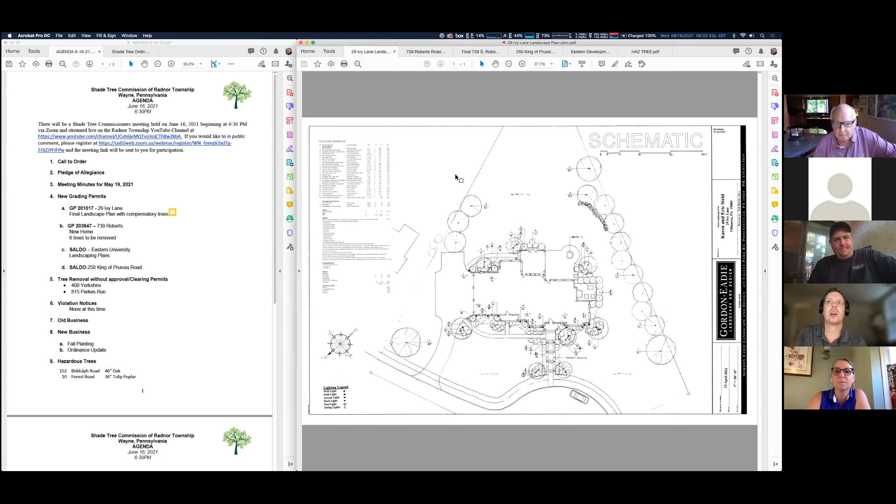So I have your plans up. If you could walk us through your project. I know that you were before us late last year as well, so if you could describe some of the updates that you had. Obviously, we're looking for replacement trees being taken down, tree protection, how you're getting in and out of the site, things of that nature.

Presently, the house is completely built. We're roofed, sided. During the process, we encroached upon the 36-inch beech tree, which was on the original plan as being saved. The house, the way it laid out, and the root system of the tree became a dangerous situation. So I contacted John and got a report from an arborist, and he deemed the tree as, after we got done building, that the root system would be compromised and that we would have to take the tree down.

So we contacted John, emailed him. He agreed with it. We took the tree down. And we have now proposed the compensatory trees with this Gordon-Eadie plan from Doug McRae. And we are seeking approval of this commission to proceed with the plan and have that be acceptable to replace that — not going to replace the 36-inch beech, but with trees. And we're hoping that this plan will suffice.

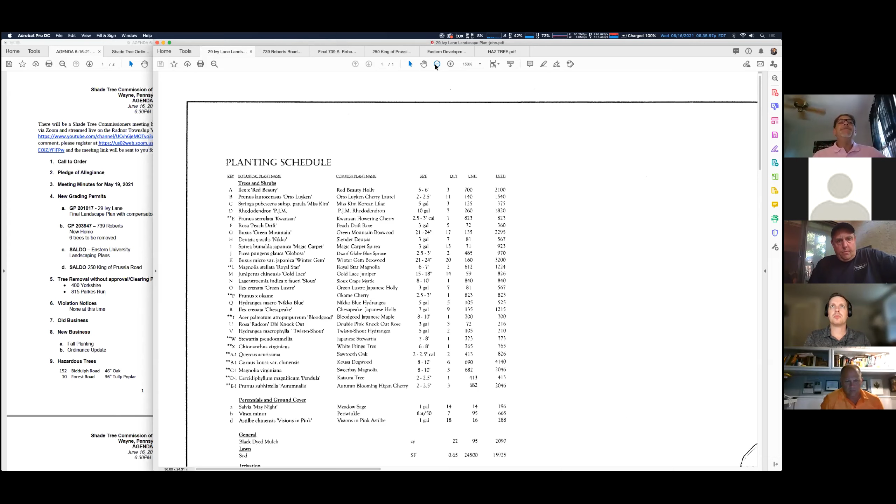Okay, can I ask a question? Yes. So I see the planting schedule and I see 22 required, 22 provided, but I know you were here earlier, but there's nothing that shows what was removed. What I would have to do is send you the original subdivision plan with those trees on it. Only reason is, I don't know if the Shade Tree Commission wants to verify that there are 22 compensatory trees required, and that's up to this commission. I'm just asking the question. Okay.

Yeah, I could send over a plan. Unfortunately, I don't have it with me right now. Yeah, so those 22 compensatory trees, those were from the previous approved removals, right? So this is just an amended plan with that new tree being removed.

Because of the beech trees, Jeff. Right. Correct. I asked that they be here tonight. Sure. So I'm seeing the double asterisks. I'm seeing more than just our required 6. I'm seeing 1, 2, 3, 4, 5, 6, 7, 8, 9, 10, 11 trees. Correct.

And to confirm, these trees weren't a part of the original replacements, correct? That's correct. Okay, so these are new additions. I did ask Bob to expound on his planting schedule because of the nature of the tree. The tree was very healthy. Approximately 38% of the root system was going to be impacted.

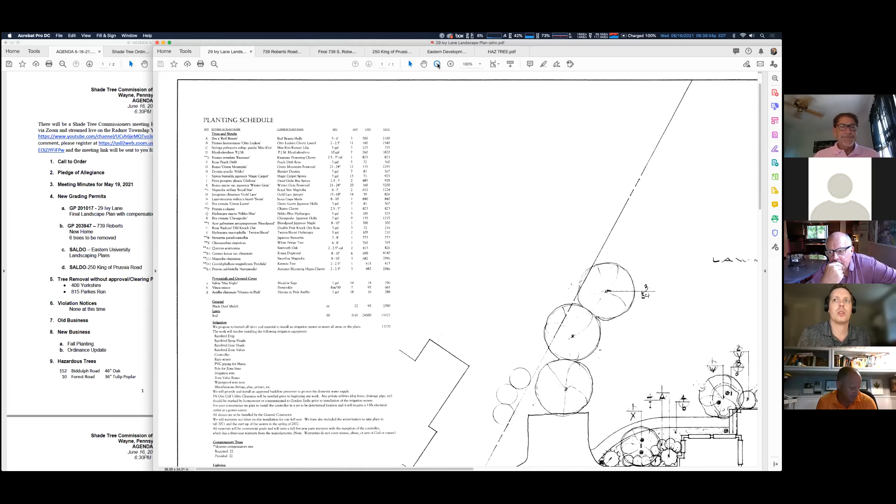So my suggestion to the commission would be, to Steve's point, we should get the previous plan that shows the tree that was removed, just so we have that on file. So hold on one second, I'm gonna send this to Ian so he can pull it up. Okay, thanks, Trish.

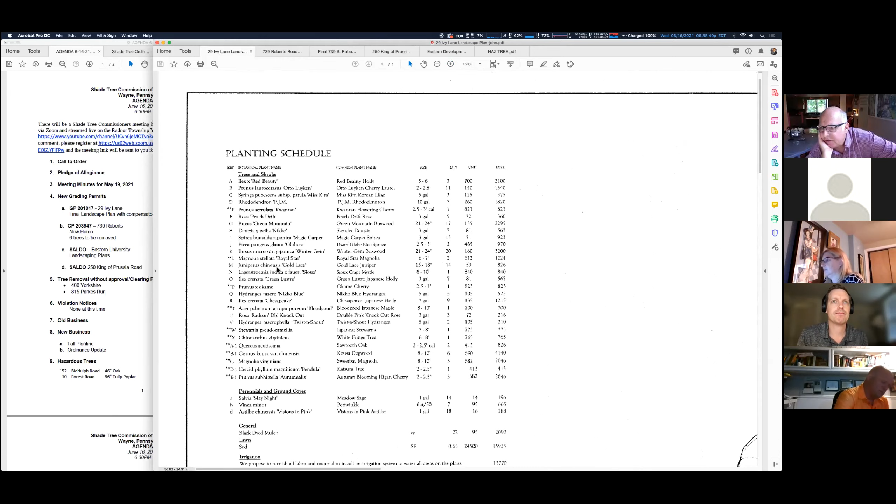Before we move forward, does anybody on the commission have any comments or questions? Is there any reason for shade tree protection to be shown on this plan, or are we past that stage? We are past that stage. The protection was originally for that beech tree. There was no other protection to provide.

Okay, so there's nothing going on here right now construction wise. We're in the finishing stages of the house at this point. Okay, and Ian, I just sent that to you, the landscape plan that we're looking at has not been executed yet. So this is scheduled to be planted. The trees are scheduled to be planted starting about the 3rd week of July. Okay, that sounds good, got it.

If Ian's unavailable to pull it up, I can see if I can dig it up quick, Trish, if you want to send it to me. I got the email, it's just taking a second to scan, and then I can switch to my screen. Perfect, thanks Ian.

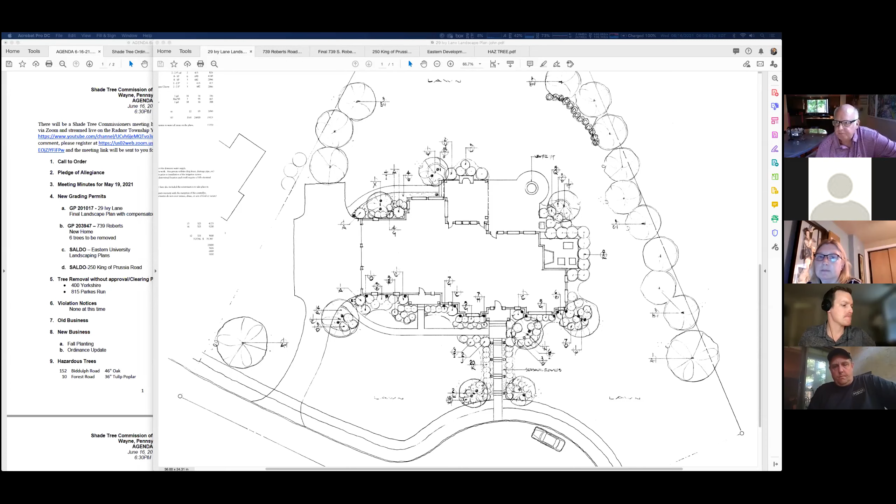Do we know how many large canopy trees were supposed to be planted on this? Well, it should be 4 for this new tree, for that beech, in total. Because we don't have many, there's not many large canopy trees in the plan. I see the sawtooth oak, I guess, is 2 of them.

Yeah, I will say we previously approved this. Absolutely, that's why I'm asking, because if there was no large canopy, then these could go towards it. But there was no heritage trees in the previous plan. I got you. But I think I would recommend that, depending on what the plan was approved with, the 4 additional large canopy, I think we should see more in this planting schedule.

There's not really, unless somebody sees something else, but the oak, I guess I don't know if we consider Katsura. It's a medium-sized tree, yeah. They're all medium or smaller sized trees, so I think since there was a healthy tree, there should be some large canopy per the ordinance planted.

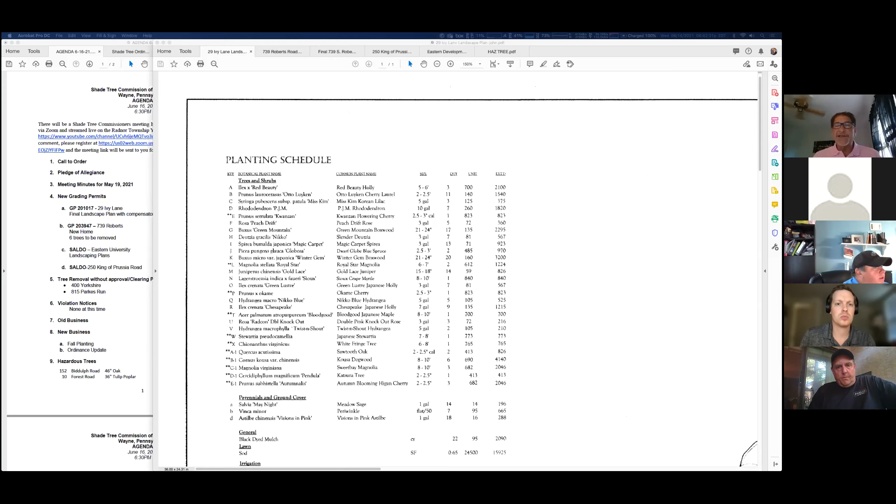Can I make a suggestion? So usually the Shade Tree Commission likes to see the tree table for the whole job. Have Gordon-Eadie provide, from a combination of the last and this, noting what was removed, what's compensatory, include the beech, note what was from the previous plan, because I think what you're seeing here, they're struggling to determine if the compensatory trees are correct. But since the other plan is from 6 months ago, they have nothing to go back to. Okay, yep, we could certainly do that. Yeah, that's just a suggestion. I don't know if that's what the Shade Tree Commission wants to do, but that's just a thought.

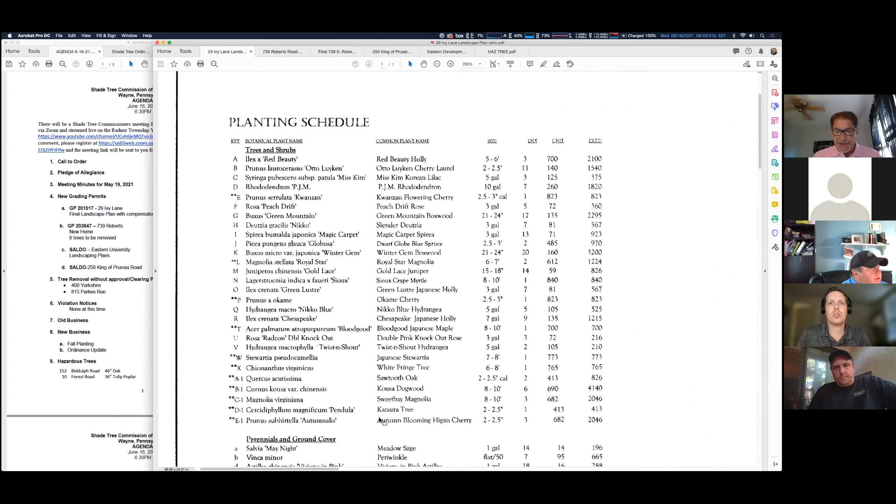Yeah, I would agree with that. Yeah, that seems good, Steve. Ian, how you making out? I have the plans ready to go if you want to switch to them. Okay, yes, go ahead. Thank you.

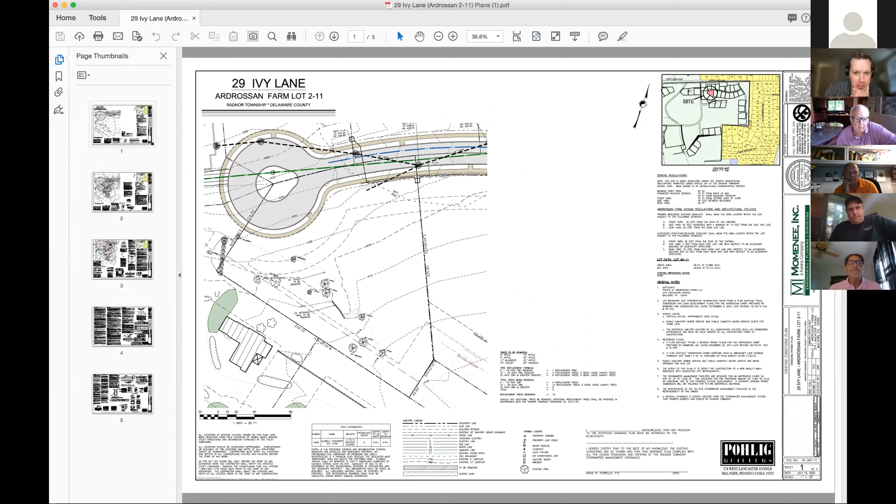All right, so obviously this plan is pre-house. Is there a page in these plans that shows... there we go, okay.

Is there a page that shows the beech tree? So that beech tree is located right where you see the angle of the red dotted line, right off the front corner of the house, southwest corner of the house. That is the beech tree. Got it, okay.

So does anyone have any questions from the commission on this particular set of drawings we're looking at? Straightforward. I think this should be submitted along with the revisions we're discussing, which are to revise the plan to show the tree table, really digging into the large canopy trees, make those revisions.

Is there a table in this plan here? On this plan, there's not. Okay. Were there trees removed? There's a table on the plan previous to this one that shows the trees that were removed. And then there's an approved township plan of the compensatory trees we proposed to replace the ones, if you keep going one more page.

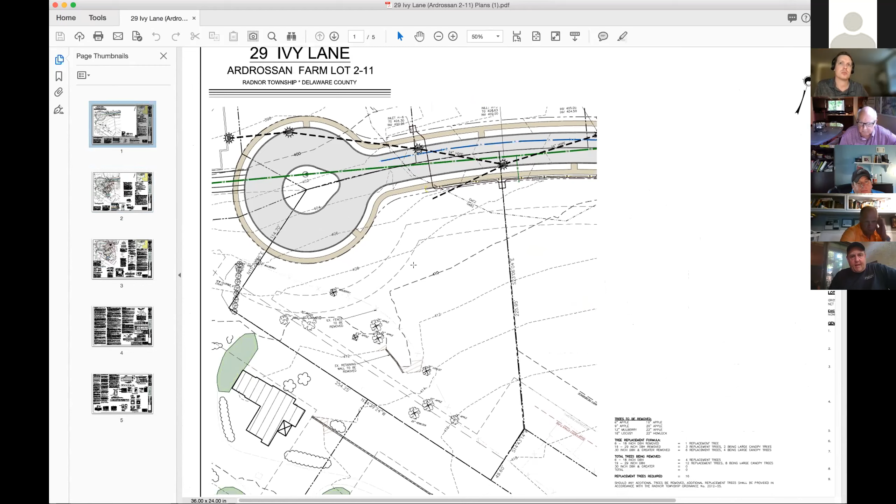The ones with the X through them are the trees that got taken out to accommodate the original approved plan. Right, and then there's the tree formula, bottom right. Can we enlarge that?

So it does look like there were a few that fell between the 19 to 29 inch range, which would require 3 replacement trees, 2 being large canopy. Where are you seeing the 19 to 29, Seth? So, 20-inch apple, 22-inch apple. Got it, yep.

So 8 being large canopy, that was with this plan. And then with the beech tree being removed, we would need 4 additional, so that would be 12 in total that would need to be large canopy. So the plans that I was seeing, I don't think we saw 12 large canopy in that planting schedule, which I think would be the discrepancy we're looking at here.

So we would have to take the original approved plan from the township and overlay that onto the plan we're looking at tonight. We will do that and resubmit this so you can see clearly what we're intending to replace, both the original and the beech tree, with the large canopies. Okay, just make sure Gordon-Eadie takes a look at our approved tree list.

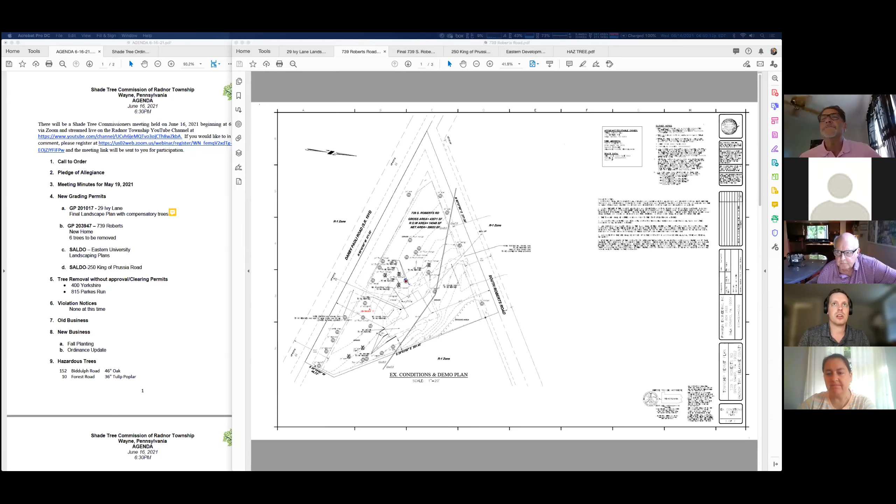Sounds good. Good evening, Heather. Good evening. We also have the applicant who is also in the meeting. Perfect, sounds good. And I know Matt and James, you were working to review these plans and make some revisions. I grabbed the latest plan that was outlined in your email, Matt. So this is the one I have. Yeah, Seth, that should show 30 replacement trees. Okay, great.

So Matt, do you want to — actually, before we have you speak, Matt, if we could have just a quick overview of the project. If we could go through the trees being removed, trees being replaced, and access points in and out of the property and any tree protection. Sure, I'm happy to do that.

So this property — Oh Heather, I think we lost you for a second. If you can hear me, we can't hear you. Yeah, it looks like your screen is frozen. Froze now. Let me see if I can message her through the chat. I think there was also someone else on the line from this property, the applicant I think. Hi, I'm the applicant and I'm on the line, but I think Heather's probably the best person to talk this through. Is there any chance you could maybe text her quickly? Yes, it looks like she dropped, so she might be trying to get back on. So we'll just give her a minute, thanks.

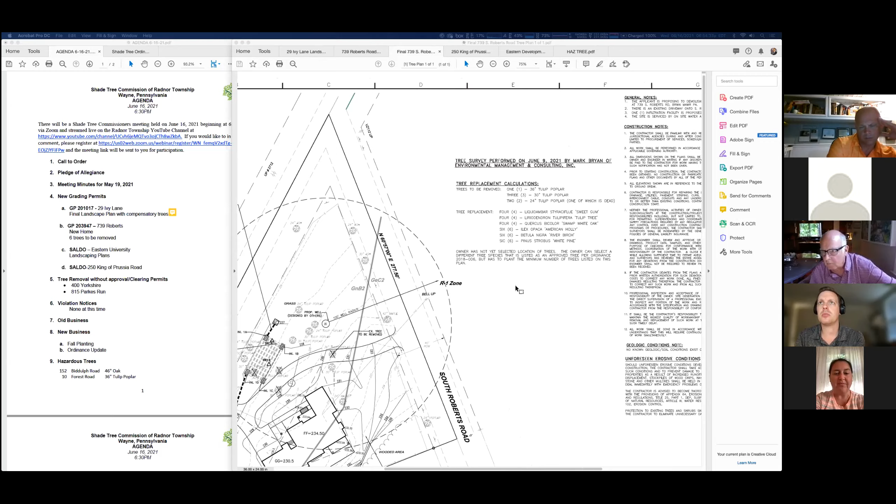Great, thank you for that overview. Sure. And Matt, I know you were going through some items, so go ahead and continue where you were. Yeah, so basically James and I signaled to Heather that the plan was missing some key elements that Shade Tree needs to see, so she hopped on it and used our formula for replacement to produce the replacement chart. And like I said before, all the trees needed to be labeled by species and size, and that was done. Tree protection looks fine.

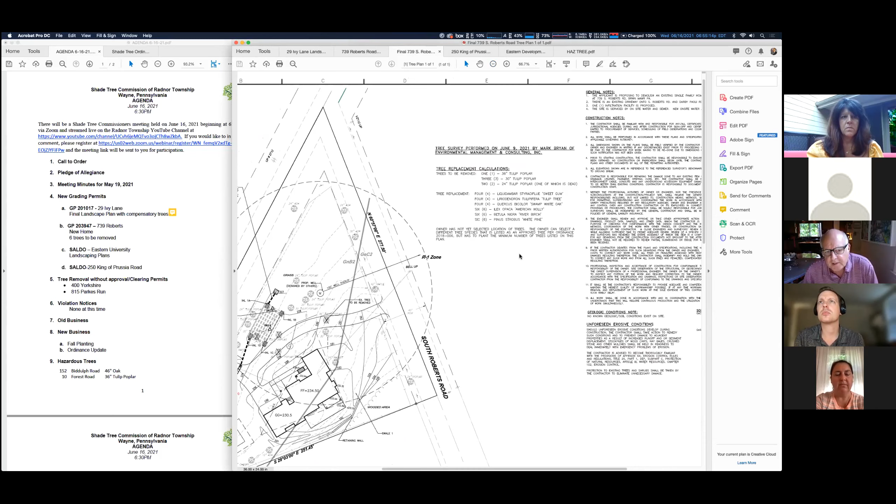Very good, thanks for running through that, Matt. I do see this note, Heather, that the owner has not yet selected location of trees, so we don't yet have the planting plan, which I think is okay from our perspective. Just wanted to call that out.

But also just wanted to note there was a comment about tree species, making sure that if there are any changes, they need to retain being large canopy versus not, per the formula. Correct, if there's any deviation we will make sure, but on the plans we picked, there was a combination of large canopy, and we'll absolutely be picking from the shade tree list if there's a deviation, but that we're putting forth the type of species and the amount of trees required by replacement.

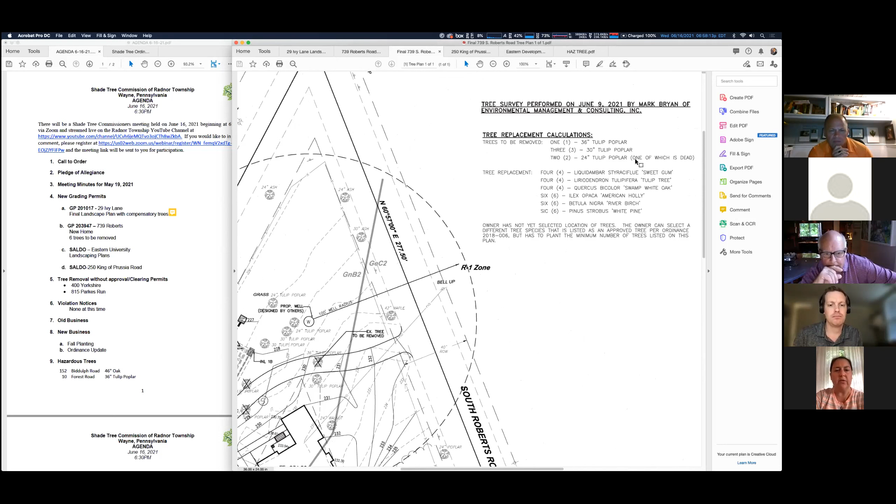Do we have a report for that tree? We don't, but we worked with Mark Bryan of Environmental Management & Consulting, who specializes in identifying wetlands and various landscaping. He performed a site visit to verify all the tree types and diameters, he's a specialist who went out on site. While he was there, he noted that one tree was diseased, several of the others were in average condition at best, but there was clearly one in poor condition.

Okay, we do require a hazardous tree report for anything that accompanies tree removals over 6 in count. So what I would recommend to the commission is that, based off of all the revisions made, it looks like everything checks out, but we should get that hazardous tree report on file, and it sounds like it wouldn't be a problem. It would not. I'll have Mark Bryan get that to you immediately.

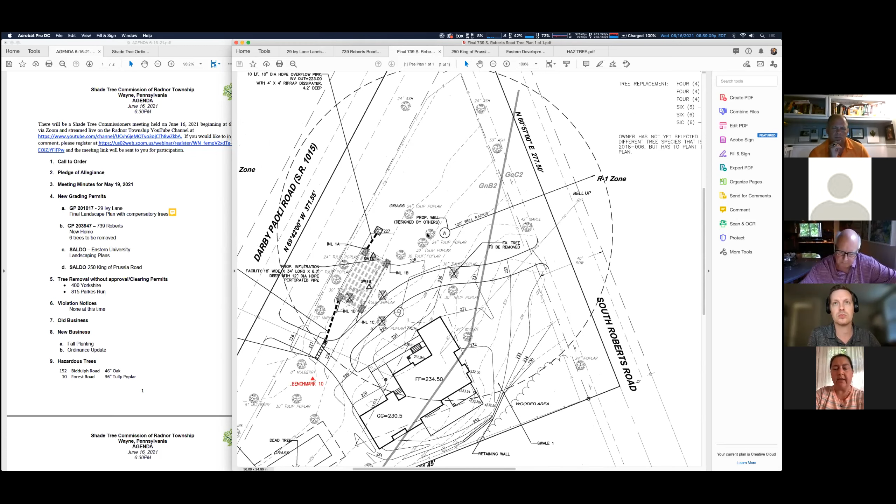Any other comments or questions from any of the commission members? Silence is golden, good. Let me ask you this - I talked to Matt and Matt was extremely helpful, so Matt, I appreciate that.

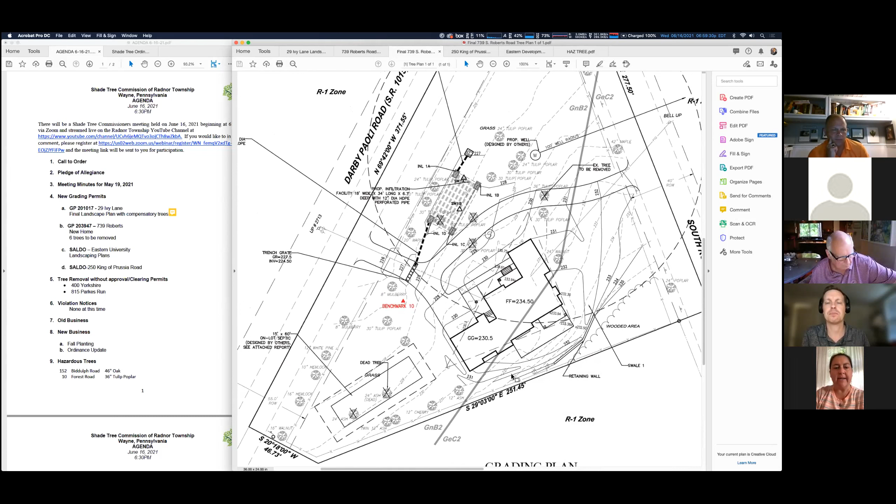Assuming we get this letter to the township by the end of the week, I don't think Steve Norsini had any comments. Would we then be able to obtain an approved permit in the next week or so? Yeah, I mean the idea would be we would approve this with that condition, so as long as that gets in the hands of the township sooner than later, that shouldn't be a problem.

That sounds great. Are you, like Heather, asking for the final approved permit? Is that what you're asking? No, correct, so we can't guarantee that. It's going through our outside engineers, so we have to wait for them to give the final approval.

Once that happens, then it'll go to Steve. He will review all of their notes, dot all the i's, cross all the t's, sign off on it. It'll then come back to me, I'll process it and then call you that it's ready. Okay, that sounds great.

And Gannett Fleming will reach out to you directly if they have comments on the plan that you need to address, so that may be an intermediate step in there. And one quick thing that we didn't run through specifically was tree protection.

Matt or James, did you guys get a chance to dig into that? Did you have any questions specific to that? It looks fine to me.

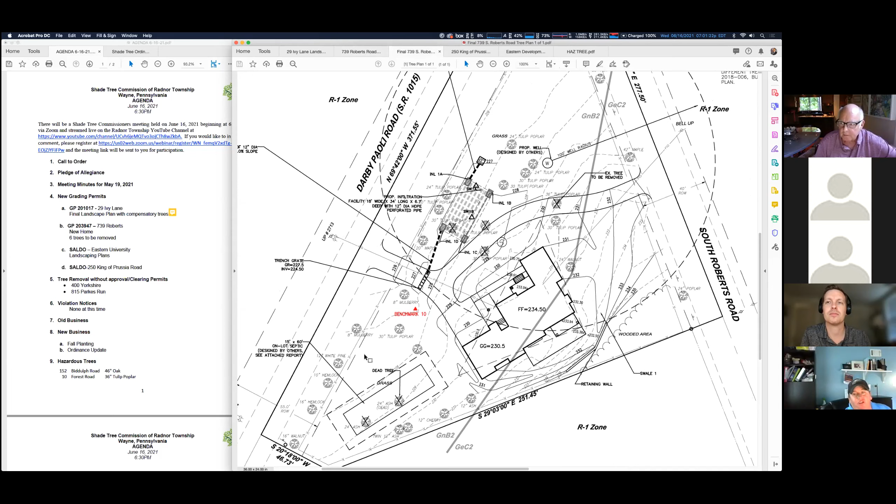I would make one suggestion though: the hazardous tree report should be from the arborist or the company taking down the tree, if you're doing a hazardous tree report. Right, by a certified arborist. Yeah, so just noting that - ISA certified. There we go. Thank you, Steve. Correct. The only way to go.

Okay, so it wouldn't be from Mark Bryan Environmental Management & Consulting. It would be from whoever is the contractor doing the tree work. Right, yeah, thanks for that clarification, James. It has to be a certified arborist, and anyone doing tree service work in the township has one of those folks on file, or at least they should. There is a hazardous tree report form online, Heather, and that'll outline what you need - the pictures, the requirements, the certified arborist's number, all that good stuff.

One question - is the hazardous tree being compensated for with other trees or not? I'm sorry, I didn't hear that. Are you planting trees in place of the hazardous tree or not? Well, I think so, if you do the math, yeah. They are, so yeah. I wouldn't require that any hazardous tree report be done since we usually do that if you're not going to replant.

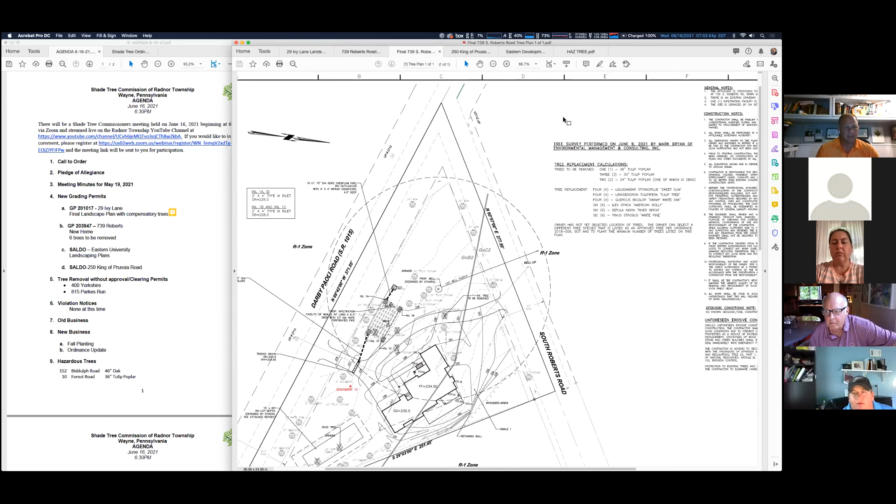Just so the homeowner and you guys know - that is a good point. So I wouldn't hold anything up for a hazardous tree report. But I still think we would like to have it on file, though. Yeah, absolutely, we need it on file.

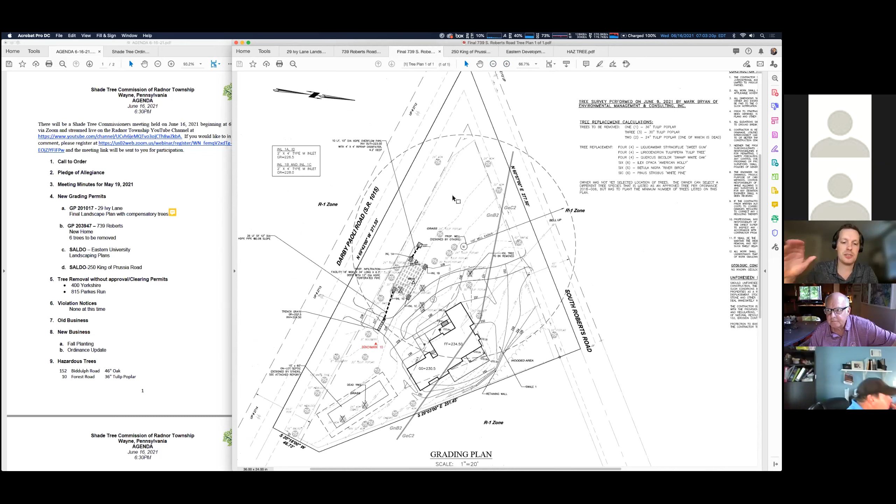Okay, well, I'll make a motion to approve with the contingency of getting that hazardous tree report on file. Do I have a second? Second. All in favor? Aye. All right, thank you so much, and good luck with the project. Thanks, Heather. Thank you very much.

All right, I know we have Eastern next on the agenda, but Eileen asked me to hold that in case she's able to hop on. So if we could go to 250 King of Prussia Road first, and then jump back to Eastern, if that's okay with everyone.

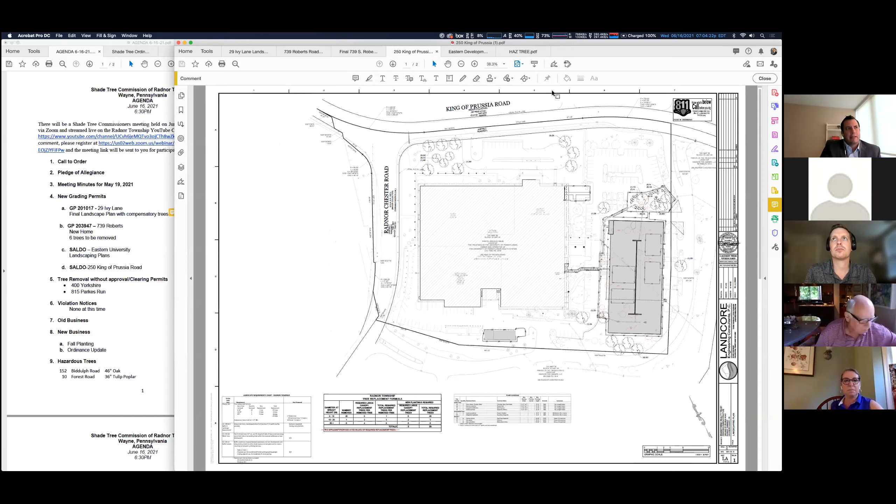All right, so who do we have from 250 King of Prussia? Good evening, this is Bob Tucker from Kaplan Stewart, representing the applicant, BDN 250 King of Prussia. Hi Bob, welcome, good evening. The applicant owns the property at 250 King of Prussia Road. We're seeking to construct a parking structure to add much needed parking to this building, which the applicant is seeking to re-tenant. It was recently purchased. This evening I have a representative of the applicant, Joseph Trainer, as well as our engineer, Alex Tweedy. Alex is going to go through the design of the land development plans, and I think Joe will make a few comments before. So with that, I'll turn it over to Joe.

Thanks, Bob, sounds good. Thanks everyone for your time tonight. I'm Joe Trainer with Brandywine. As Bob mentioned, we're currently going through the land development submission and review process for adding a parking garage at 250 King of Prussia Road, which is done in an effort to improve an existing parking deficiency on site. There's an existing building there now - it used to be the Penn Medicine facility. We, Brandywine, purchased the property from them after they moved to their new facility down the road. As part of modernizing the existing building, one of the things we're looking to do, and really the big aspect to the project, is adding a parking garage to resolve a parking deficiency. As part of that, we do have some trees that need to be removed and replaced, and Alex Tweedy from Landcore will walk you through the plans.

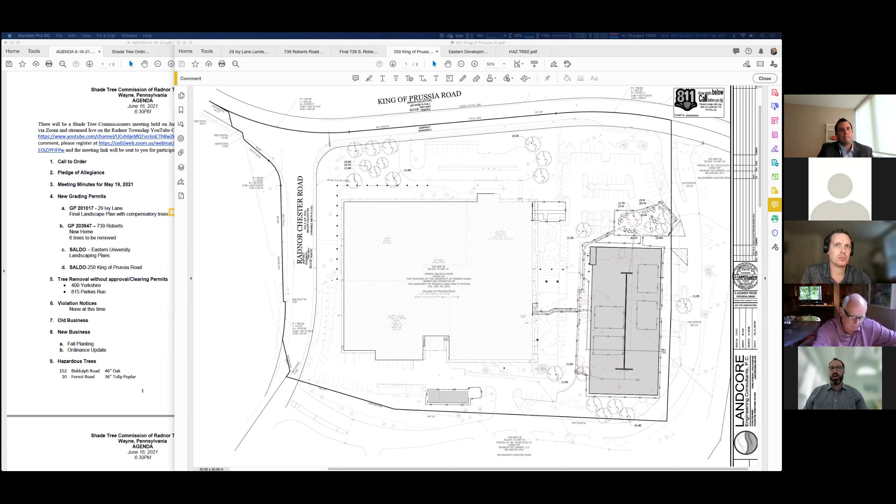I also wanted to note that as part of our land development submission, we are requesting a waiver for street trees around the existing building. However, after we received our review letter from our initial land development submission, I had asked Alex and his team to take a harder look at the street trees and really add more trees along Radnor Chester Road and King of Prussia Road where possible to help minimize the waiver, which Alex will also walk you through tonight. So with that, I'll turn it over to Alex, and thank you again for your time tonight. We're looking forward to hearing your comments.

Thank you, Joe. Thank you, Joe.

The drawing shown on the screen is the original submitted land development drawing from the original submission. All the trees you see on this drawing are the replacement trees. In the footprint of the garage, shown in red if you zoom in, are the trees being removed. We have them shown underneath - if you're familiar with the property, those are basically the existing surface parking drive aisles that are there today. So the trees being removed are really the parking lot trees in the center islands along those parking rows.

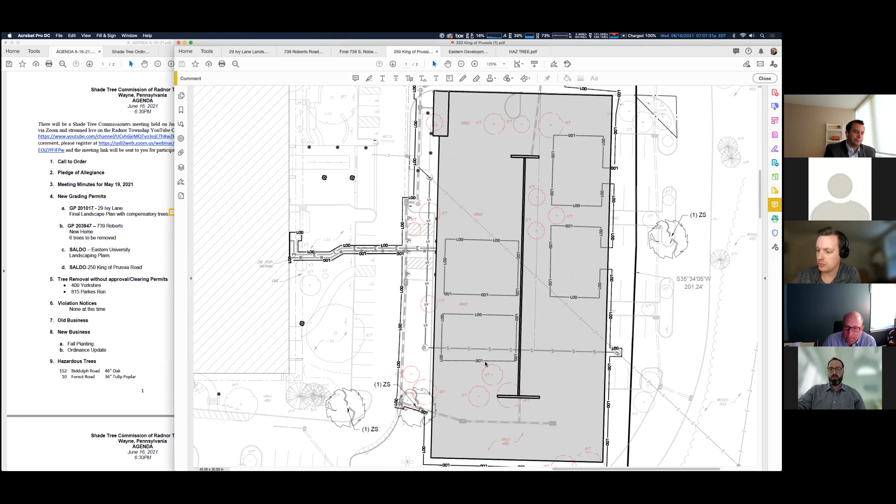There are 21 trees total being removed, 20 of which are below the 19-inch standard. If you go into the bottom right corner, peeking in at the very bottom of the garage, there is one 24-inch tree being removed that triggers the next classification for three replacement trees.

So there's a total of 23 replacement trees being proposed for the project. As Joe noted, in discussions with the Planning Commission and with the review letters, there are a variety of landscape waivers as part of the land development application, one of which is a parking lot tree waiver. Since it's a parking structure, obviously we can't plant trees within it, so there's a waiver for that landscape requirement, as well as a street tree waiver requirement.

In discussion and coordination, both internally and with the Planning Commission, we have looked at places to add additional street trees. This drawing shows a red line of where we feel we can add additional street trees and the species we would propose in those locations. With this alignment and the existing trees, this would be 50% of the required street trees. So it would just be a partial waiver for proposing half the street trees, and then a waiver to not install the remainder.

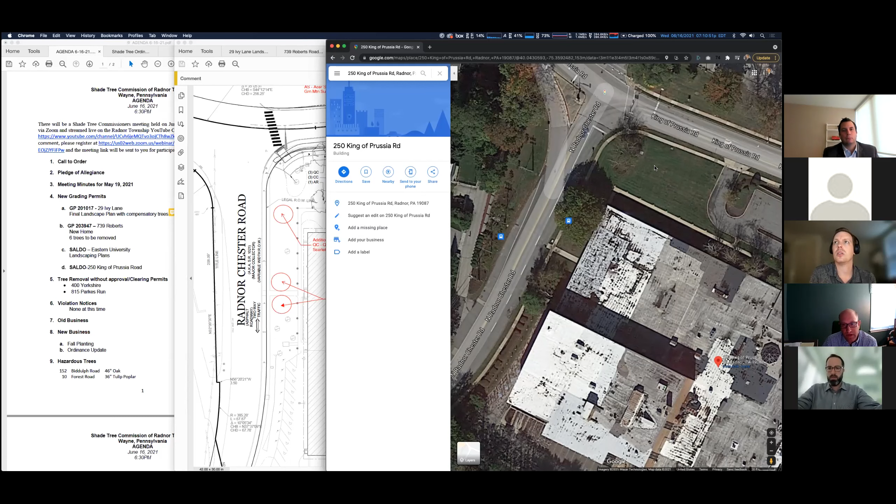And then on the upper right, that large green space, that's where we're putting the majority of the replacement trees from the original landscape plan. Okay, and then the remainder street trees are just lining King of Prussia Road, down along the rest of the property there. Sure, okay, thank you.

So the tree replacement formula checks out to me. What we just need to verify are the large canopies - they're all proposed as large canopy. Okay, yep, I was just drilling into the plant schedule real quick to verify.

Matt or James, did you get a chance to review this in detail? Do you have any questions? Yeah, the required trees look good. There's only 2 large canopy and they have October Glory in there, so they're covered just with that.

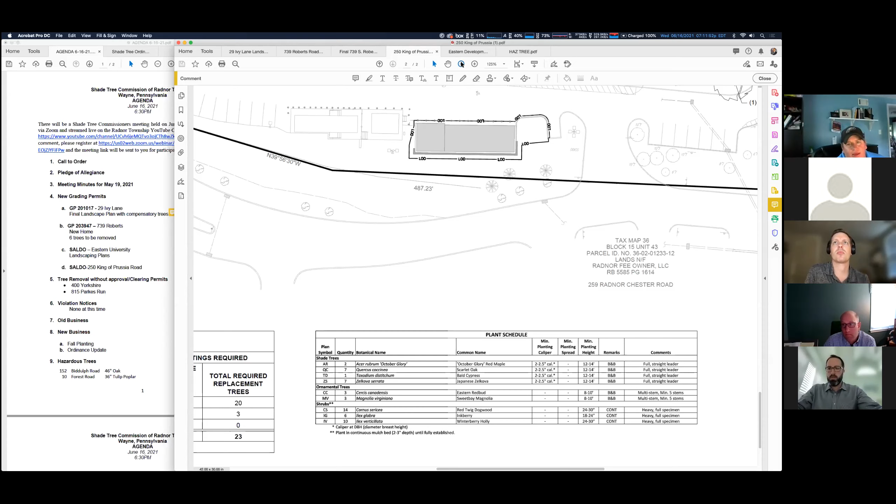But one question I do have is the rain gardens - are they in place of something, for some other reason, like stormwater management? I don't know that I follow the question, but yes, you have rain gardens there.

Are they put in place because of stormwater? The rain garden is our proposed stormwater management feature. We originally had an underground basin, and through the zoning process, there was additional green space desired with this design.

Where the rain garden is located is actually existing parking lot today. We agreed to reduce the total parking yield by 10 to 20 parking stalls through the land development process and converted that underground stormwater facility to additional green space, reducing impervious coverage and converting to a surface stormwater system, which also allowed us to plant some additional landscape material.

to improve the aesthetics of that entrance as well as some circulation items. The reason I'm asking that is this would be for Steve. There's trees in the rain garden, Steve, that are counted in the replacement schedule. So I'm wondering, are they able to be intertwined? They might be able to, I'm just curious.

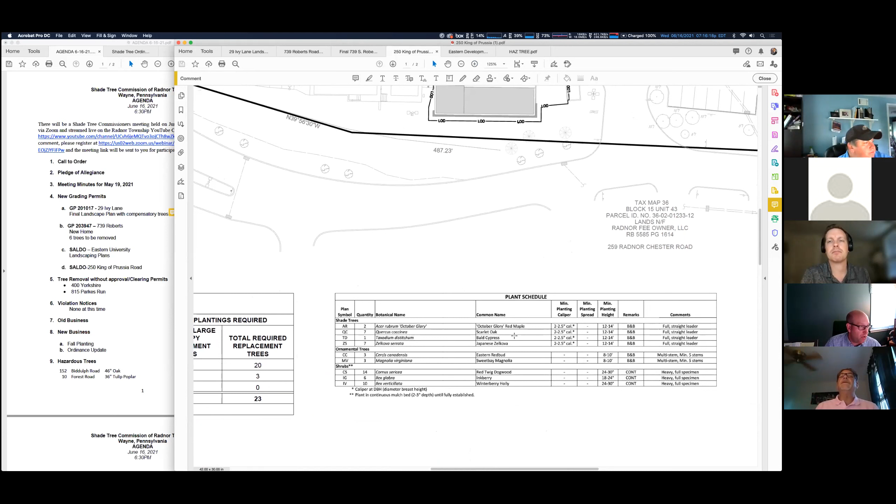So we have 9, 10, 17 trees that are shade trees. Correct, that's a red maple, scarlet oak, bald cypress, and Zelkova. And then we have 6 additional ornamental trees, which are eastern redbud and sweet bay magnolia. And then we have 30 shrubs, which are in the rain garden, and those are red twig dogwood, inkberries, and winterberry hollies. So just for the shade trees, the shrubs are ornamental, they're not part of the count, but the shade trees and ornamental trees do comprise the required compensatory trees: 9, 10, 17, 20, 23. Okay, sorry for any slowdown there, I just want to make sure I'm up to speed and everybody else is.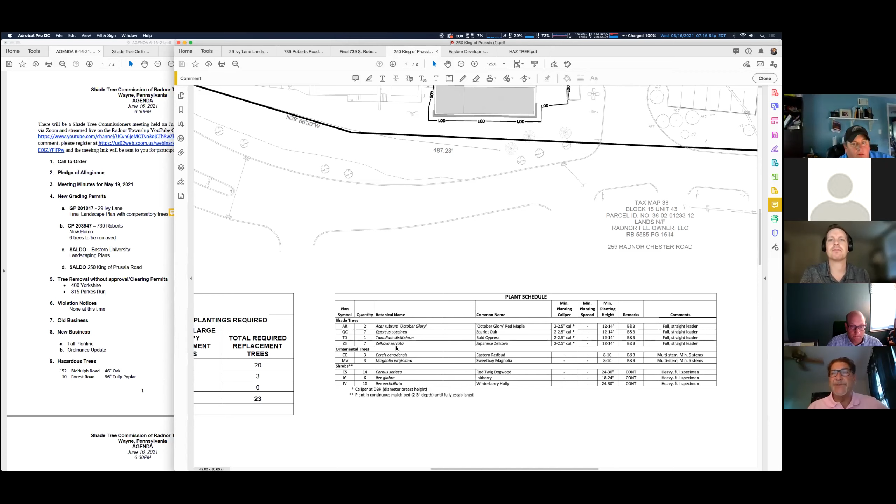Correct, so then we go to the street trees. Can we go to sheet 2 for that? Let me pull up the math I did for that. For King of Prussia Road street trees, there's 640 feet of frontage, so with 1 per 30 feet, that requires 22 street trees to be required.

There's 7 existing trees along King of Prussia Road. The Radnor Trail is planting 1 tree, you can see right by our entrance in the corner. And then we are proposing 3 additional as shown on King of Prussia Road. So that equates to 11 total trees out of the 22 required, which is half of the required street trees on King of Prussia Road.

And then similarly for Radnor Chester Road, it's 415 feet of frontage. At the 30-foot spacing, 14 trees are required. There are 4 existing trees and we're proposing 3 more for a total of 7, which is 50% of the 14 required. This math is spelled out in the lower left corner of this markup if you want to look at that instead of my explanation.

So Steve, are trees that are already in place able to be counted towards that part? Mr. Tweedy noted this is a partial waiver. So this is a waiver request, whether it's partial or not, it's a waiver, and that's solely at the discretion of the Board of Commissioners if that waiver is granted. I want the Shade Tree Commission to understand it and opine on it, but in the end, when they go through the land development process, they're going to be before the Board of Commissioners, and they will be the one to say yay or nay on the street trees.

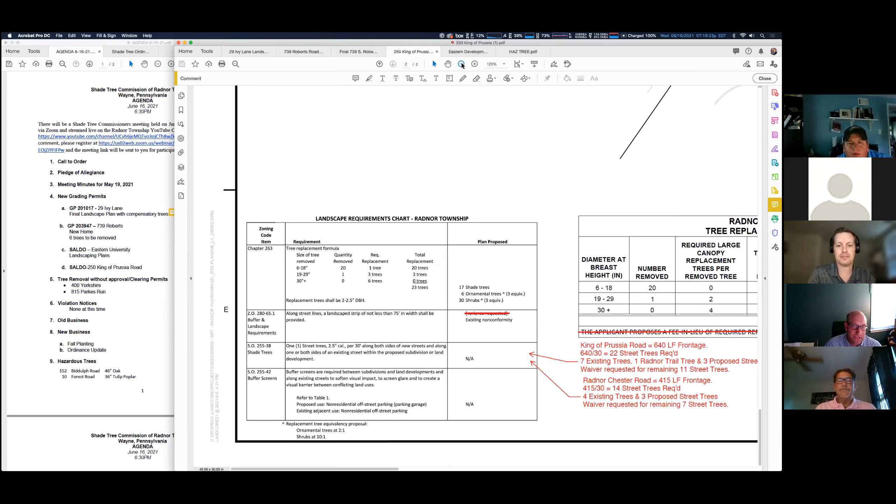So Steve was accurate. And Alex, just another point of clarification, your red line adds trees along the street in every location currently feasible, utilizing the existing space we have and taking into account all of the existing trees. If you go back to that aerial, everywhere we're proposing the 3 trees on both frontages are the pockets we discussed. So we already covered Radnor Chester Road, the 3, 2 on either side of the sidewalk and 1 at the corner. Then the green space is full with our replacement trees.

And then starting on King of Prussia Road, we have this isolated cul-de-sac parking lot. So we're putting 1 additional street tree in that landscape island right by the entrance, 1 at the 90-degree angle where the parking ends and it goes to the drive through, and then on the upper right corner of the cul-de-sac bulb. And then everything east of that, you can see there's already existing mature canopied street trees separating King of Prussia Road from our parking lot.

And then right at the entrance, Radnor Trail is actually planting one tree in the very small open area that's available there, so that's already being covered by the Radnor Trail plantings. So we feel that fills in that whole frontage, and we plant it everywhere we feel appropriate, combined with what Radnor Trail is already doing for their landscape package.

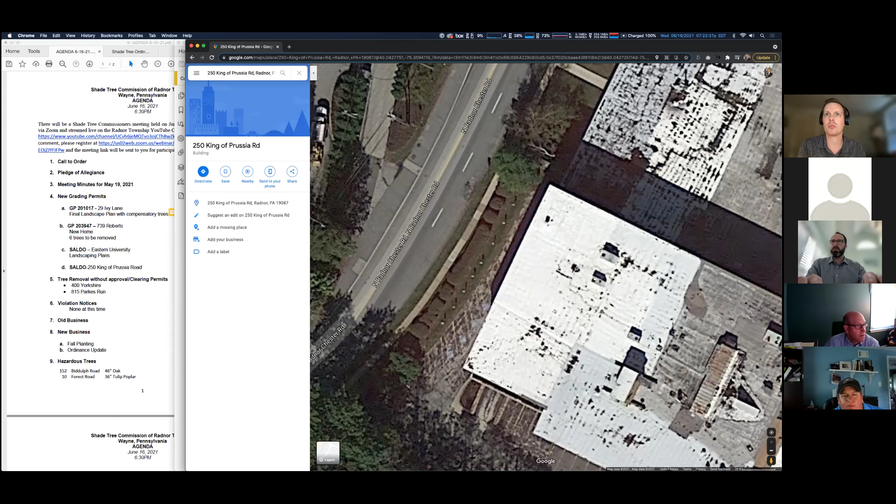And you guys could actually plant some, like an oak tree, like green pillar or something. Get a couple of those, they would make the residents probably pretty happy. If you don't have much room, they kind of grow straight up. Liquidambar, Slender Silhouette is another cool tree - they'll reach like 30 feet and block that building pretty good, and you could fit them in between. What was the second one you said? Slender silhouette.

If you don't have much space between the building and the sidewalk, it doesn't look like there's much room. That's why I'm suggesting that. If you have more room, the landscape area shrubs are pretty large, so if we took out a shrub and replaced it with a tree, I think we could fit a pretty standard tree there, but I'll review that with the landscape designer.

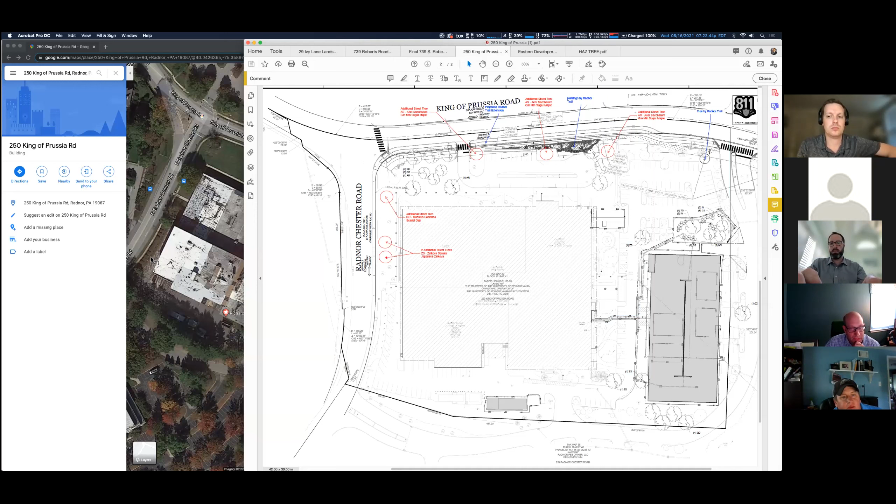I do want to make sure we're cognizant of the headlight screening comment. I mean, it'll open that up if we remove a tree and remove a shrub and replace it with a tree. So that's the trade-off. Along that corner, let's go down Radnor Chester Road here for a second. I don't think that will impact too much.

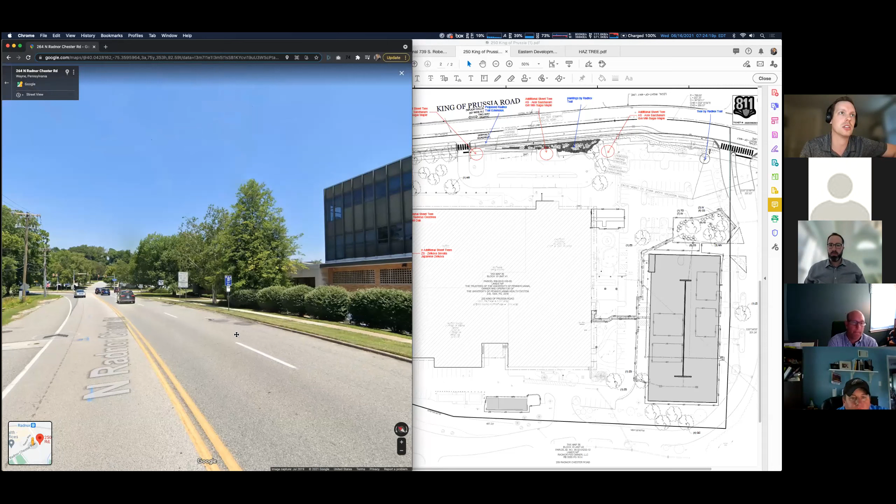I know this property has green giants planted in front, so that would be screened, and the wall's right up the street. So I don't think that would cause too much concern or harm to the folks along the way.

And Steve, just one point of clarification. So from a street tree perspective, to your point, the final approval is with the board. Really, our purview in this is really a recommendation for revision, not necessarily a straight approve or disapprove like we do with removals and replacements.

Well, I think you are going to approve or disapprove either way. I mean, the ordinance reads that you folks do approve, but the reality is the land development plan or even the grading permit has a whole other process to go through. So the Shade Tree Commission is one portion of that, but you are an advisory board.

So what I would request is, maybe when you call the vote, Seth, ask are we okay more or less with the compensatory trees for those trees to be removed—that's item A. Item B, do you recommend approval on the 50% planting of street trees? So there are two items, and I'll include your minutes, the Shade Tree Commission minutes, in the packet that eventually goes to the Board of Commissioners. Sure, okay, so it sounds like two votes are in order, just to keep things clear.

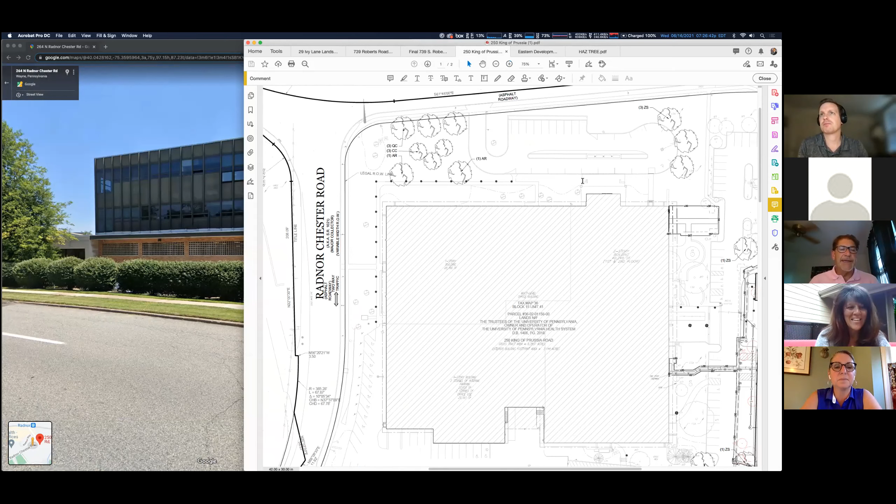And one quick clarification too, from a tree protection perspective. It looks like there's some indicated here, but if we could just quickly hone in on that for a minute and call that out.

Is there anyone on the line from 250 that wants to specifically talk to tree protection? Alex, sorry, yeah, I mean we can speak about it. The limit of disturbance is clearly shown. Basically this garage has very little earth disturbance outside the footprint of it. We are basically cutting foundations into the existing parking lots, building the columns and setting the parking structure above those walls, so you can see the limit of disturbance is shown as basically the foundation excavation.

And then we go vertical from there. Obviously the majority of the trees removed are in those islands in the dead center of the parking structure today. So the only trees really being preserved around the perimeter are on the south side, all the way up against the ring road, and then the existing parking lot trees adjacent to the rain garden. The rain garden is pretty much just an expansion of the existing landscape strip down the center, and then excavating out the rain garden. So that will be minor excavation in that area, just to basically saw cut out the pavement and dig out the depth of the rain garden.

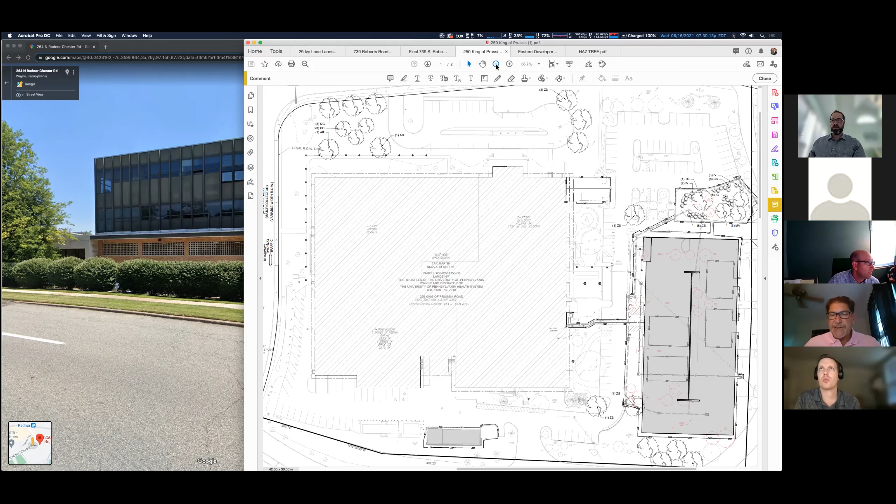That'd be great, so that's something that could be done in the field if needed. Your building inspector, whether that's Andy Pancoast or our site inspector, which we will have on the job, you can address it with them.

There is no tree protection on this plan, correct? I think what's listed is the limit of disturbance. Yeah, we show the limit of disturbance, which we use synonymously with tree protection. We can add a note that says tree protection shall be shown along the limit of disturbance line, which is typically how we handle it. That's what we always ask our residents to do. So I think it needs to be on the plan, and I have no problem redoing the plan with it on there. But you have existing trees around the building or the parking that you're going to be working on, and that needs tree protection. Understood, yeah.

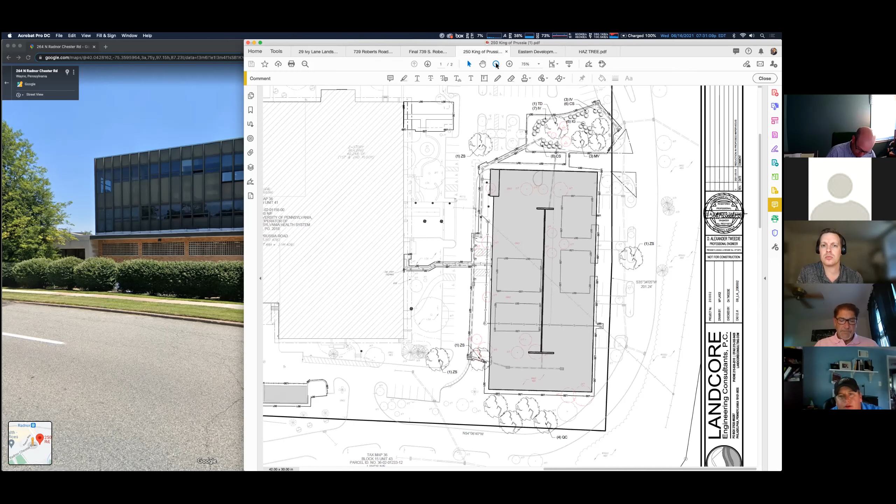Before we call a vote, does any other commissioner have questions on page 1 or page 2? At the end of the day, how many stories is this parking garage? It's 2 stories, 3 levels. Okay, thank you. It's surface parking plus 2 decks.

Sorry, one last question, because I'm a bit confused. We're voting on the street trees, that's what you said, right? So I'm sorry, can you go over that second part? We'll call 2 votes. One is the tree removal and replacements, which we confirm checks out. The second vote is going to be based on the street trees, understanding that they're requesting a waiver, but we did talk through modifying the plans, taking a second look at taking some bushes out and putting in some large canopy trees. So 2 votes, 2 separate approvals, if you will. Okay, got you, thank you.

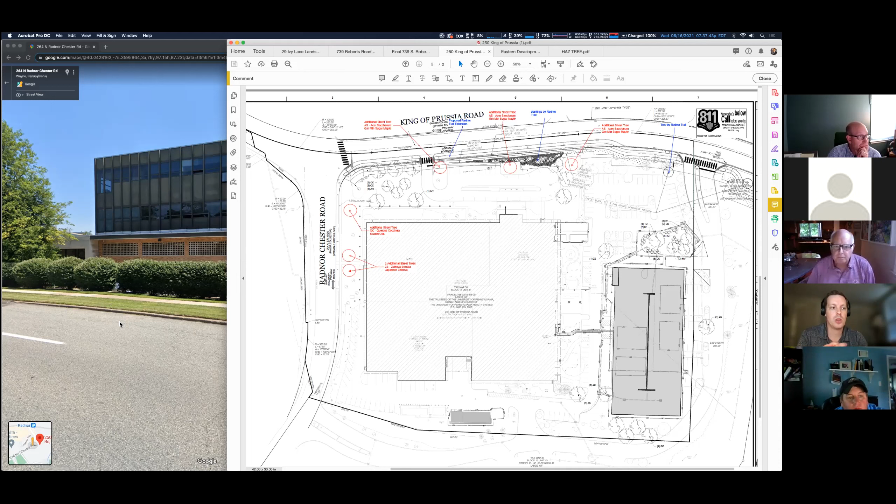Great. Okay. So let's, I'll make a motion to table this with the proposed revisions, trying to get as close to that requirement as possible. Do I have a second? Second. Second it. All right. All in favor? Aye. All right.

Well, thank you so much for going through this, and we'll see you soon. Much appreciated. Thank you for your time.

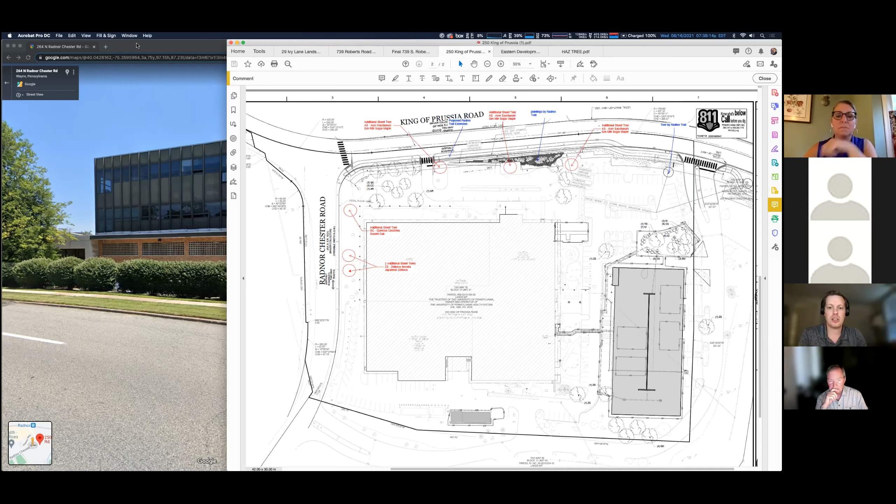Thank you. All right. I think I saw Eileen's face pop in. So I'm going to hand the baton to her if she's still on. Good job, Seth. Thank you. She shot me a text. Let me text her back real quick. Just shot her a message. We'll give her a minute.

While we're waiting, is there anyone from Eastern on the line to chat through plans? Yeah, so we've actually got a whole team. This is Dave Falcone. I think I just turned on my screen here. I did. Great. We've got a whole team here to present to you guys. You have seen us before.

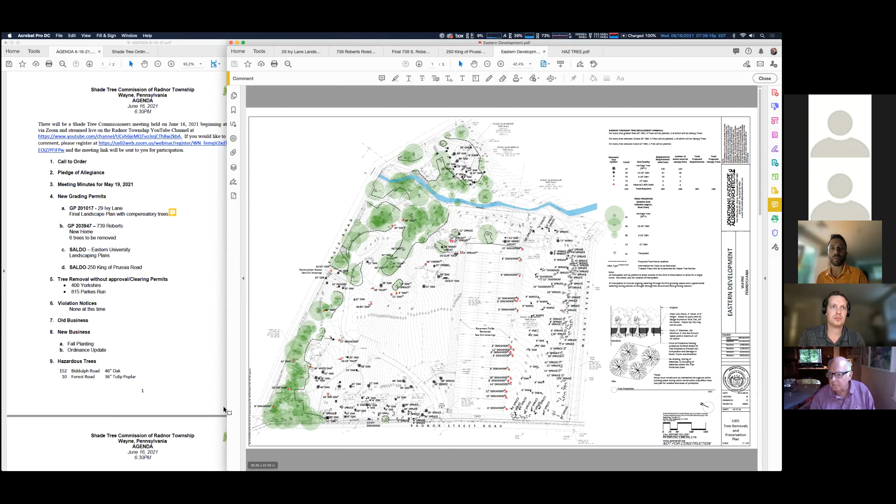We are unfortunately back to you as a result of some relief that we sought from the zoning hearing board with respect to slopes, and we were unable to obtain the necessary relief there to move forward with our prior plan, which again, you all had seen, the planning commission had seen, the county planning commission had seen, and the board of commissioners had all seen. So we were before the zoning hearing board last month, actually for the last couple of meetings, seeking a variance to disturb some slopes on the property that are man-made, although they are quite old.

And the township's ordinance does not make provision for man-made slopes. Instead, it deals with slopes that were created as a result of obtaining a grading permit or part of that process. And because these slopes predated that process, we couldn't satisfy that need. So we went to seek relief for that prior plan in order to build the 20 homes we had intended to build with that plan and in accordance with the prior landscaping plan that you had seen.

The zoning hearing board did not grant the relief that we were seeking with respect to those slopes, and we had to go back to the drawing board in some respects. We ultimately did receive some relief for just the slopes coming in on the existing parking lot.

For any of you that had been to the site, there's an existing parking lot that sits right in the middle, with some slopes bordering it. The zoning hearing board gave us relief to disturb those slopes, but not the other slopes around the existing homes on site. As a result, along with communication with neighbors, we reduced density from 20 homes to 18, and designed to an R1A criteria instead of the prior R2 criteria.

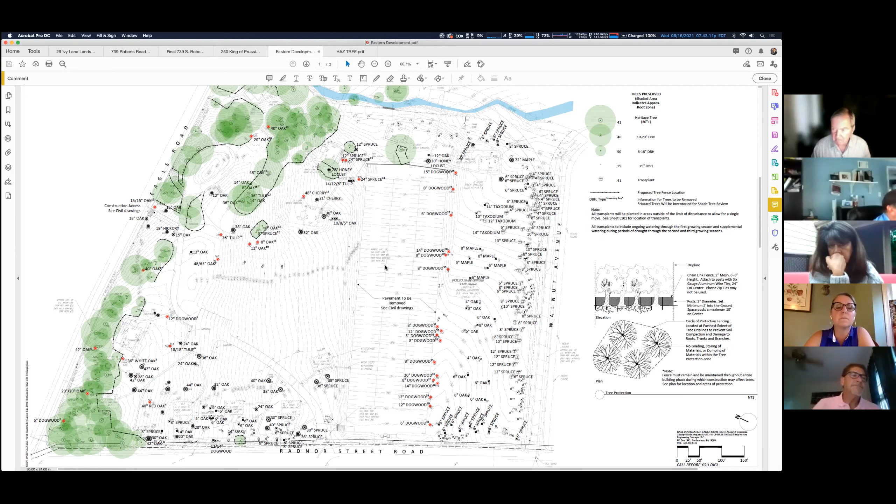Oh, are we good to go? Yep, yes, okay. Rob Lambert here, with Site Engineering Concepts.

What's up on the screen now is just the existing conditions plan with the trees being removed shown on it. If you can flip to the proposed plan—that's page 2. We went through this plan pretty extensively at the last meeting, where we garnered your support for the application. The cul-de-sac actually lines up with Beech Tree Lane on the bottom side of the page, extending the grid pattern in that North Wayne neighborhood. The big change to this plan, as Dave eloquently described, is that we now have 30,000 square foot lots.

As a result of that, the lots along Walnut became a bit bigger, and the lot that used to be along Radnor Street Road between what's labeled 5, at the corner of Walnut and Radnor Street, and lot 6, unlabeled, at the corner of our new cul-de-sac and Radnor Street Road—there was another lot in that location. You can see Jonathan's office has put in a lot of trees in that area, but that was actually a lot in the previous iteration.

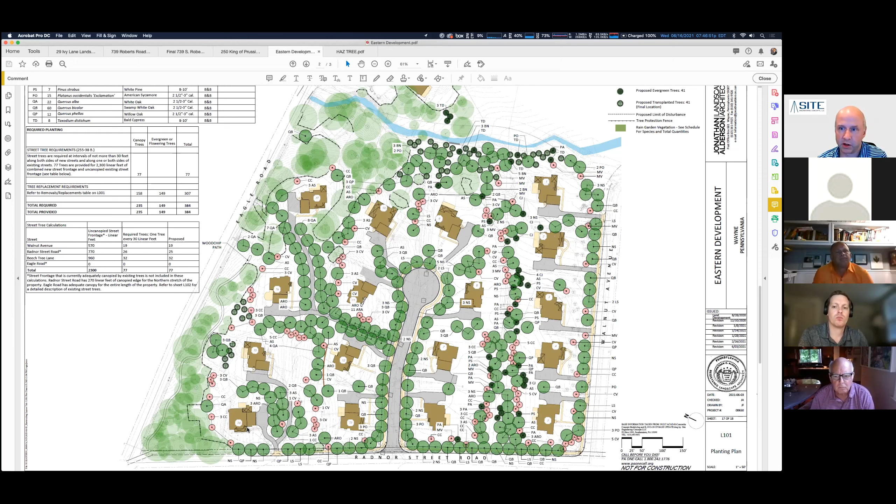I'll turn it over to Jonathan at this point. Good evening, I'm joined tonight by Jesse Forrester. So we're both going to present the plans. If you could go back to the first plan, which is the existing conditions.

By the way, we do have the tree report from Jim Ward, which you should already have from last time, and everything about that report is still pertinent to this submission. In the prior plan, there were 176 healthy trees to be removed, and in this plan that number has jumped up to 197. Of that, 8 heritage trees are going to be removed, and one of those trees is a large maple.

In fact, we had Jim Ward out to it. It's on the upper side close to the stream. It's marked as a 72-inch maple, but it's actually closer to a 60-inch silver maple, and that's the largest tree we're planning to take down.

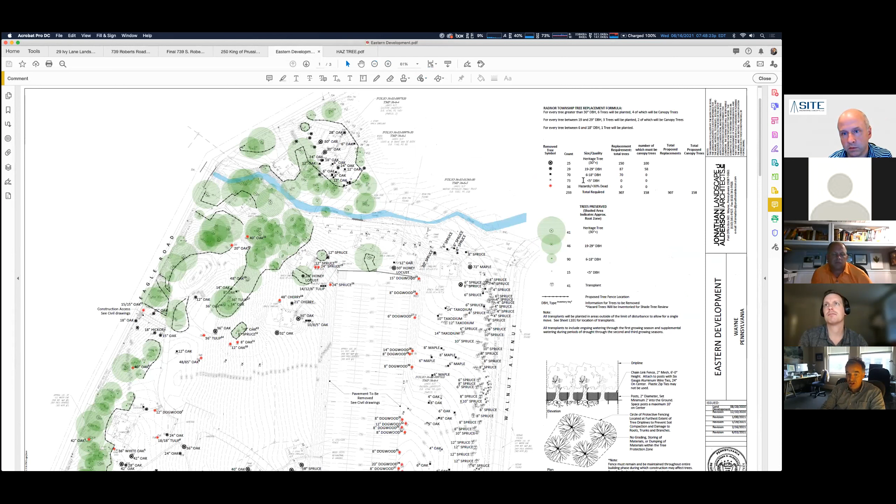There are 307 replacement trees, and that's on the second sheet. You'll see all of the trees being added as replacement trees, along with street trees. So there's a total of 384 trees that are going to be planted on the property.

Along with the lots being larger, another good aspect to the new plan is that the houses are actually further back from the stream. In the prior plan, one of the houses was around 40 feet from the stream, and now the closest house to the stream is at 72 feet. So there's a lot of good aspects to the new plan, outside of the fact that we are taking down more trees.

I think there's going to be more opportunities for landscape, and as you can see from the next sheet, we are planting the property heavily. With this extra room, we've been able to get all of the replacement trees on the property rather than having to send them off to another part of the township. I think that's basically it.

Everything, as I said before, is exactly the same. It's just the fact that we've had to spread these houses out, and accordingly there's more disturbance, and because of that these additional 8 heritage trees are going to have to be removed.

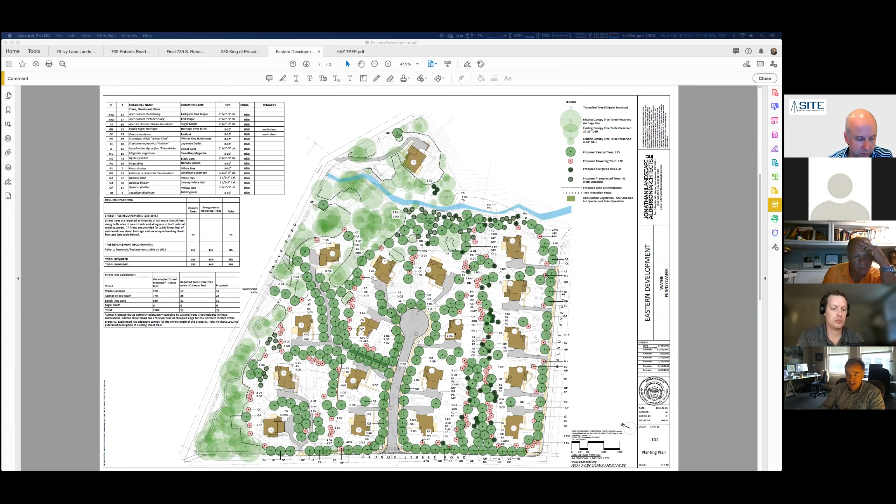I have a question, Jonathan, for you, and also one for Dave. Is there any possibility that some of these replacement trees could be bigger than what we require, just to take sort of the sting out of losing more heritage trees? In the past, and this maybe is a question also for John, maybe there's a possibility that we could reduce the number and increase the caliper size. We've done that in the past. I don't know if you'd be willing to think about that.

I don't think Matt's asking for a reduction, I think he's asking for the count plus additional large trees, I believe. Correct, Matt? That's correct. Yeah, we'd have to check with our client on that. We can talk to you about that.

And then Dave, a question for you: if this was a perfect world and you could pick one of these two plans, which one would you pick?

I think they're both good plans, Matt. Obviously, we liked that first plan - that's why we went forward and sought the relief to build it. But we also went back and spent a lot of time trying to get this plan in a place where we were just as happy with it. That's not just bluster - that's dealing with a client that cares a lot about what this place looks like, what they're planting, and what they're doing long term. They think this is a good plan.

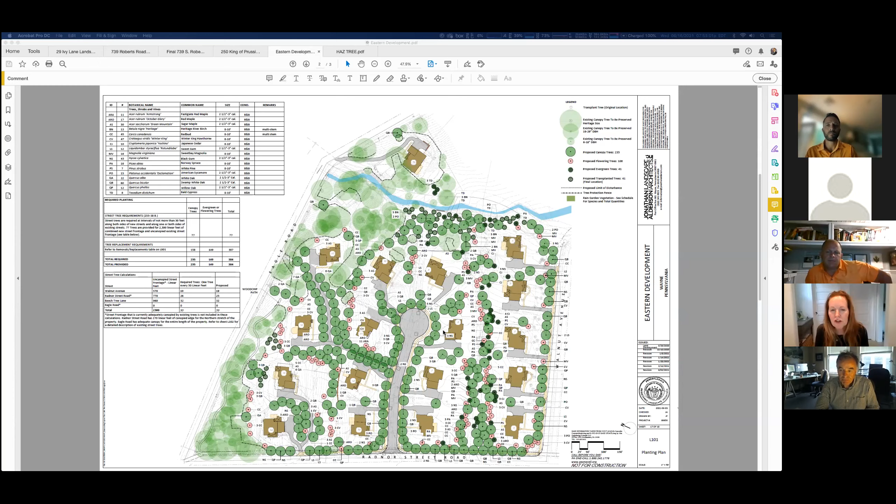Can we go back to the first sheet and talk about the trees that are being removed, in particular the heritage trees? Yeah, on the plan there we've got them all accounted for. On the prior plan there were 17 heritage trees to be removed, and now we're up to 25.

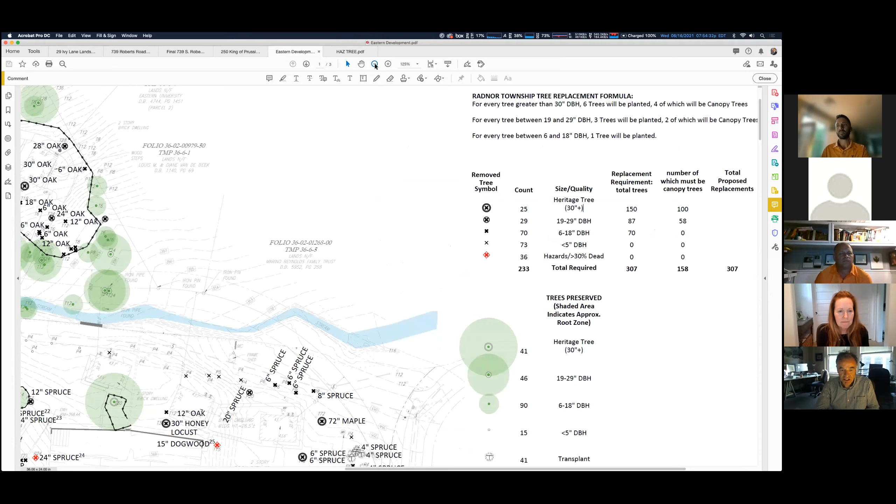They're in two approximate areas - one by the stream, you can see that one marked at 72 inches. We had Jim Ward out today to take a look at it. I was hoping he'd say something like the tree is dying and not to worry about it, but he didn't say that. He did bring up that he measured it and it's actually closer to 60 inches in caliper. It's a silver maple, which - if it were a red maple - would be even worse from my perspective. But that's a major tree.

Seth, would you mind if I drove the screen? Yeah sure, by all means. Okay, I'll pull it up on mine. This is Jesse, by the way. Oh hi, okay Jesse - he's technologically more adept than I am, that's why he's here tonight. Not only that, he's also a really great landscape architect.

All right, can you all see my screen? Oh, nothing just yet. Not yet, yeah it's loading. All right, you should see it now I think. Yep, all right.

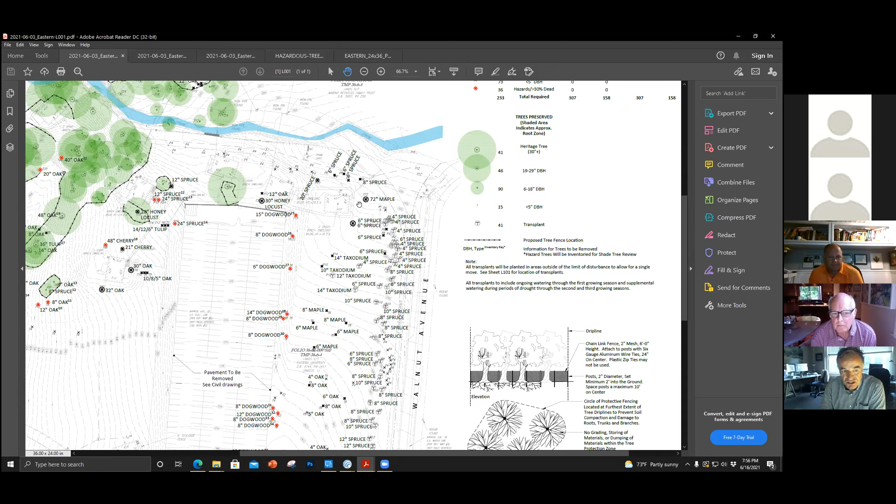Yes, the bulk of the high quality heritage trees we encountered in our initial evaluation was here, lower left side of the plan, the northwest corner of the site. Radnor Street Road is at the bottom of the sheet, Eagle Road to our left. Valley Forge Military Academy is over here, to give you some context. This is the top of the hill of the site. There were many great oaks up here, and we've strived to the extent possible to protect as much of this grouping of oaks as we can.

We lost more oaks up here in the new plan, partly because our lot sizes needed to get bigger and the houses needed to be pushed further apart. So we wound up with a house in this vicinity where we did not have one before. The other complicating factor is that we need to site our roads and buildings in a way that dodges any steep slopes, not counting the steep slopes associated with this parking lot or some existing buildings. We need to avoid those, so this is where we ran into a number of additional heritage trees that needed to be removed.

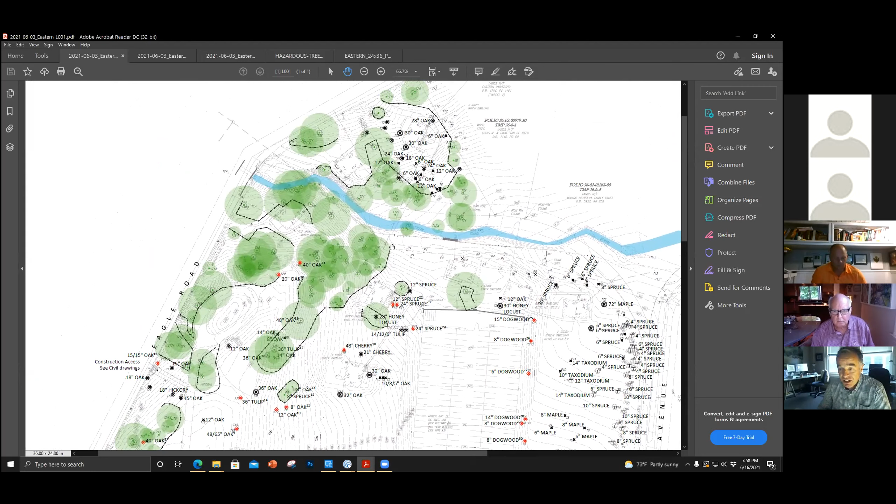But it's important to point out that we're still saving a significant number of the heritage trees on the site. There's been a lot of work since the last plan to really make sure Rob Lambert minimized the grading and saved as many of them as we could. So do we have a number on how many are being saved?

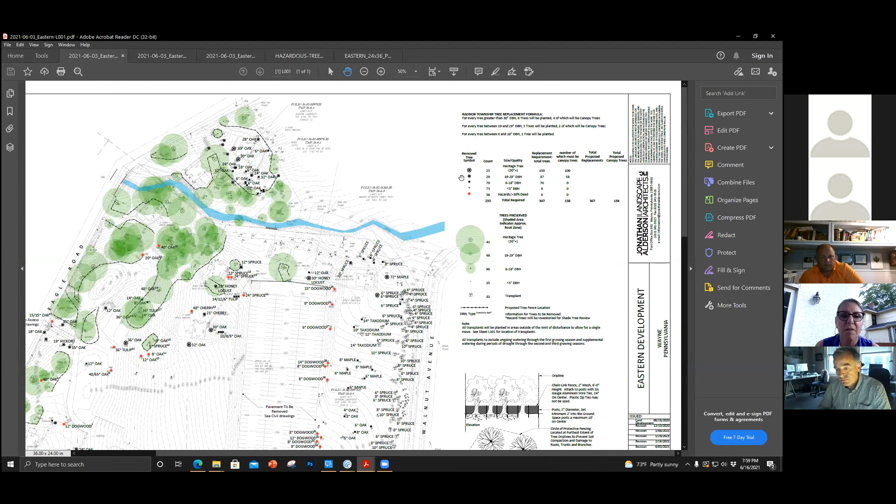Yes, it's on... I can't see. Yeah, it's on the next sheet. I think we've got... oh, it's on this sheet. There we go, there's the trees preserved number. Oh, excellent. The reason I'm asking is because I am a little bit sensitive, and as a commission I'm sure we all are, that if there's going to be some removal of trees in the Fenimore Woods section of the park, which is very close to this, that's just a lot of canopy loss in a condensed area. I just wanted to bring that up.

Yep, good point, Claire. Yeah, so it looks like overall you're taking out about 35% and leaving about 65% of the heritage trees. That's correct, yes. Okay.

And I had sent out a memo this morning. I had done some canopy measurements, and those three houses, 14, well, I don't have the numbers in front of me. 14, 15, and 18 reduce about 3 acres of mature canopy out of the 18 acres. So it's a concern that we're losing a lot of mature canopy. How much canopy, Frank, in your estimate? Those three houses, we lose about 3 acres of canopy out of the 18. So we go from like 54% to 38% canopy for this property.

Just to support what Claire was saying, you'd probably have to factor in the new trees in order to get an exact measurement of canopy, how much canopy will exist after the project is finished. Well, I thought about that, Matt, and I didn't think a 2.5-inch tree would provide that much canopy in the near term.

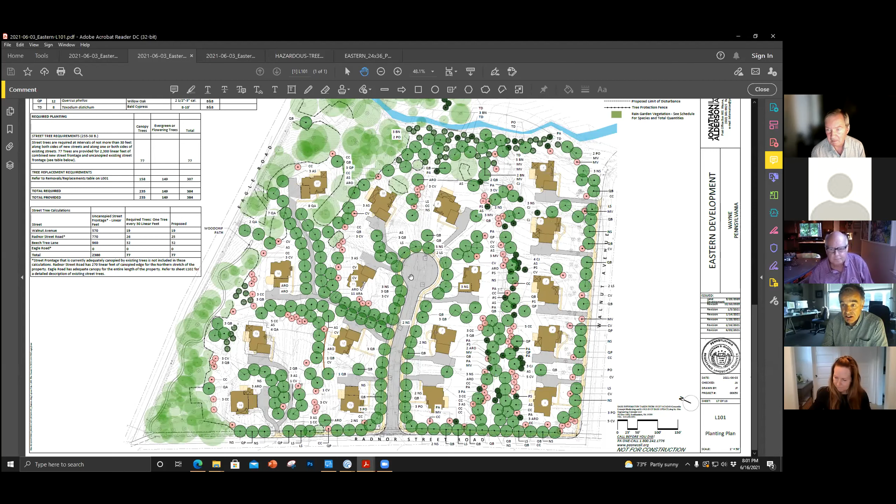I just like to say that a lot of this site right now is paved over. It's a car park. And that is going from a car park to, those trees are going to make a difference. Right now you've got a property that's... I mean, there are some beautiful trees which we've tried to save as many as we could. But outside of that, you've got lawn and car park. It's a virtual desert out there right now. And our client is putting in 384 trees onto this property.

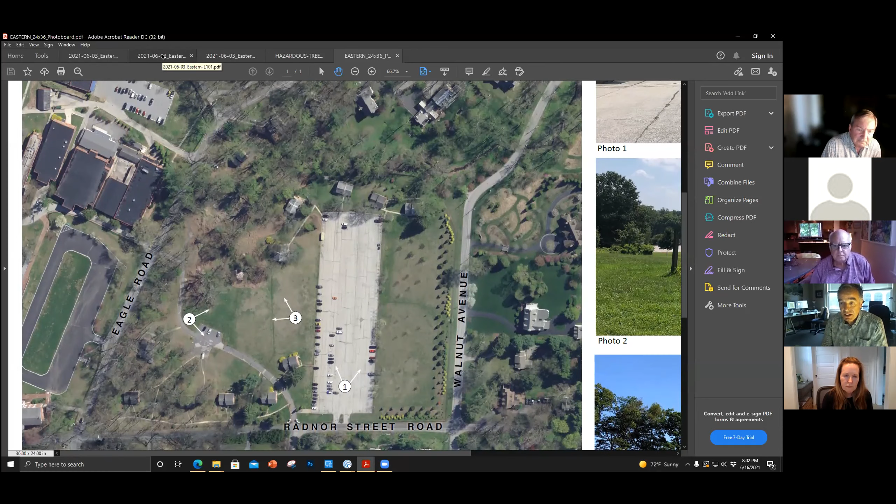It's got support from all of the neighbors. All the deciduous trees are natives. We do have some evergreens that are non-natives. We've got a client here who's really concerned about having this feel like it's part of the fabric of North Wayne, and wants this to seamlessly integrate into North Wayne, and has support of the neighborhood, and has done a really brilliant job. We've got tree protection around all of the heritage trees that we're saving.

It's unfortunate we're having to come back to you because of this one point from zoning, but I still think this is a great plan. We've typically had trouble getting trees planted back onto the site when taking down a lot of them. Here's the benefit: we've got larger lots, and we've got the opportunity to get all of these trees planted on this property rather than having to donate to the Shade Tree Fund. So I think this is a tremendous plan.

When you look at what you've got there right now with that large car park, this is a significant improvement. Follow up on that, Jonathan: this plan actually has less impervious coverage than exists today. A lot of the times when you talk about tree cover and canopy, it's driven from a stormwater management question. Right now we have more impervious coverage with no stormwater controls that have direct runoff downstream. So not only are we reducing the impervious coverage, but this site will have full stormwater controls for all the impervious we build. So you're getting a double benefit through this development.

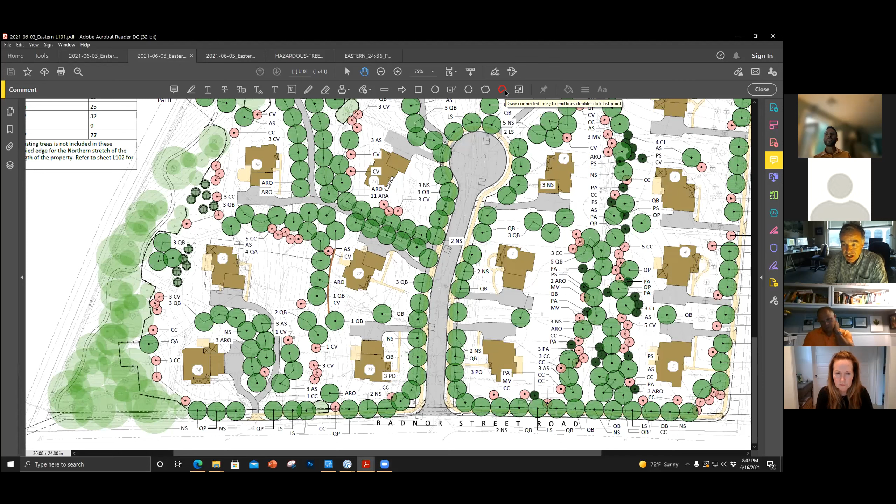I'm trying to look at all the positives to this. We're further away from the stream, and we have the opportunity with the space to plant more trees. So there are benefits to this plan. The plants we're putting in are all native apart from some of the evergreens. So there are some great aspects to this plan, and it's not all bad.

We are taking down those additional trees, but Jonathan, excuse me for interrupting, you guys have done a great job. I think what I understood Eileen's question to be is: could 14 and 15 be moved more to the right?

And I'm understanding that that's not possible, or is that true?

No, I'll chime in on that one, Jonathan. The location of lots 14 and 15 is dictated by the slopes that were made. They're man-made slopes, but they happen to be built before 1979, before the ordinance passed, so we were unable to get relief to disturb those slopes. It sounds silly from your perspective that we can't disturb this man-made slope, but it's a zoning regulation we were unable to get relief from. That really dictates where we can build both of those, and both houses got pushed toward Eagle Road because of the man-made slopes.

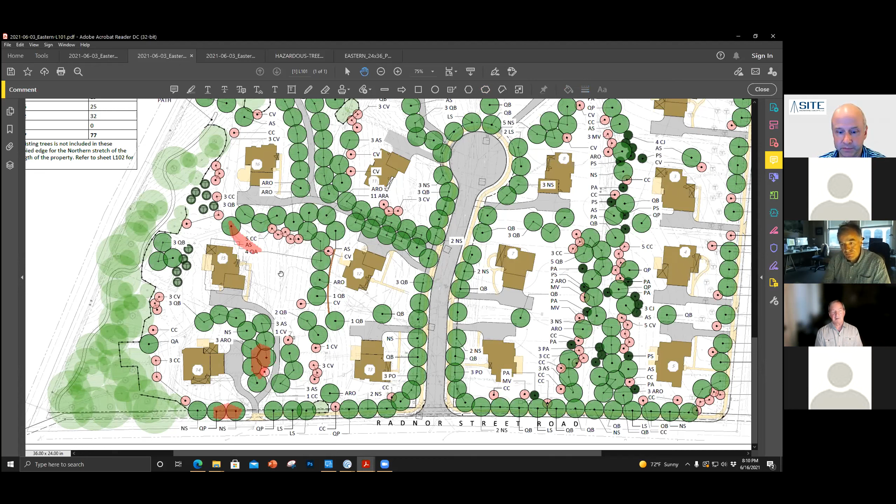Yeah. Okay, thank you. Well, just a question then - what if the driveway didn't come off of the main road for sites 14 and 15 and instead came off of the interior road, would we be able to save any trees?

I don't believe so. Was it an option that was looked at? We did look at that option. I don't think that relocating the driveway, if you came off the shared driveway off the cul-de-sac, saved any trees. Correct, we did look at it - we had a driveway coming off the cul-de-sac, off the Beach Tree extension, to lots 14 and 15. They didn't really help us with the trees. It's the placement of the houses with respect to the steep slopes that are impacting the trees - the driveways are almost incidental.

Okay. Do you want to tell us, we've heard, hey, this is a great plan, so do you want to tell us about the 384 trees that you are planting? It would be good to understand how many are a large canopy. We've got that on the table.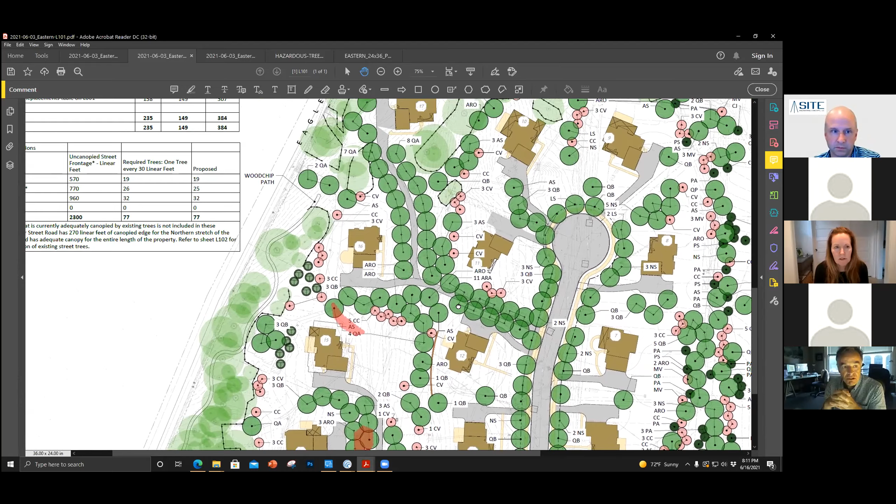So you can see there on the table, we've got a combination - there's large canopy trees associated with the street trees, that hasn't changed from the plan you saw first. The number that's changed is the 158 canopy trees that are replacements for the trees we're removing on the site. That number's increased, so the total, along with evergreen flowering, is 307, and the total number of trees is 384, along with the street trees. Above that you've got the plant list of the plants we're using.

Eileen, you had asked about doing an overlay. Yeah, if I could steal the screen real quick - and it looks like there's a couple gaps I'd like to talk through if everyone doesn't mind. So give me one second.

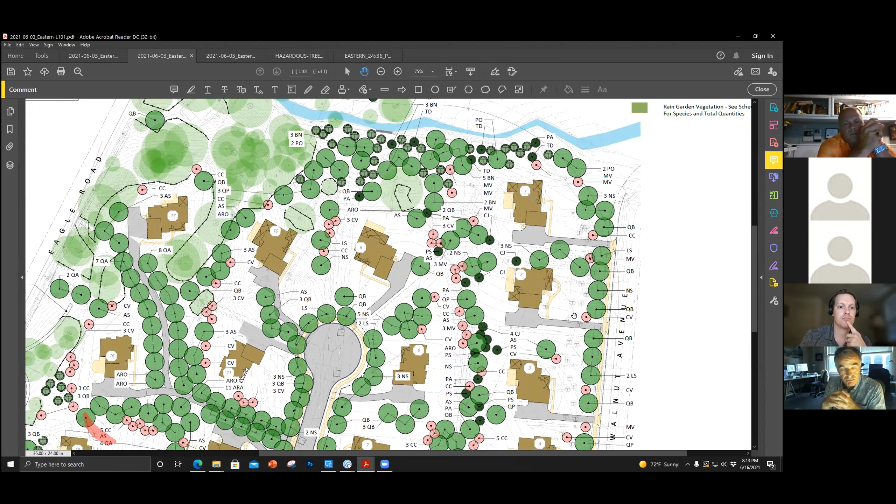Oh, before we do that, just one more thing to add - we do have a number of transplants that we're incorporating into this plan too. The trees you see with a T are trees that have been transplanted from along Walnut Avenue, you can kind of see them lightly on the plan here. We're moving these to the perimeter where they can be safely transplanted without disturbance during construction. There's a lot of effort there in trying to preserve trees and take advantage of good trees that are of a size that could be moved with a tree spade. There are 41 of these trees being moved on the property. That's right, and they'll be done during dormancy.

And their location, as Jesse said, is so that we can get them out of the way of construction - it's the first thing that'll happen before construction starts.

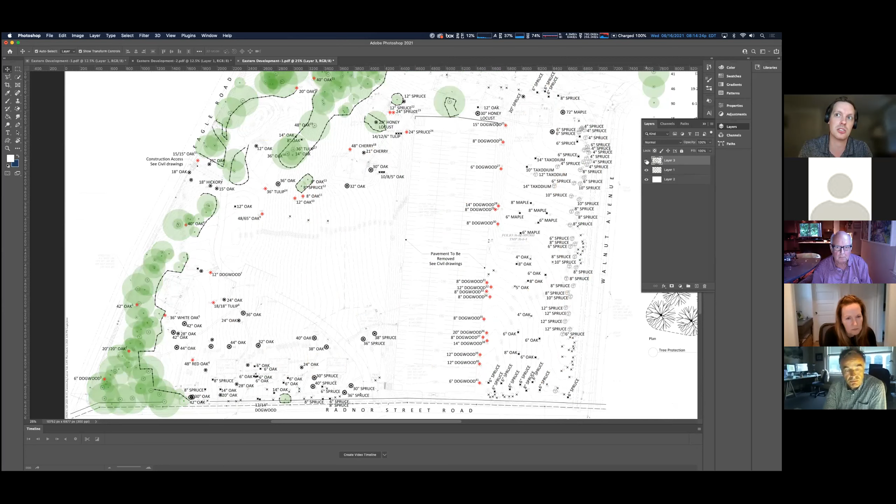Here's the removal, and here's the new home edition overlay. You'll see it's exactly overlaid on top. If you match the bottom right road and bottom left tree line, you can see it's exact. So what I'm seeing is this 42-inch oak marked as being removed, but the homes are over here, same with this 36-inch oak. So could you speak to why these need to be removed when they look far enough from the homes where they could be saved?

Well, Patrick, do you want to talk to that, or should I? I can speak to that.

There's a pretty significant grade change going on through this site. For home 14, for example, if you were to zoom in, you'll see the contours through that area. There's roughly 9 or 10 feet of grade change occurring just across the width of that building. So the building itself is being cut into the hillside, and there's grading around that building that's really carving into that hill.

It's pretty much like the first project that you saw where trees had to come up because of grading for stormwater. It's the same situation we have here.

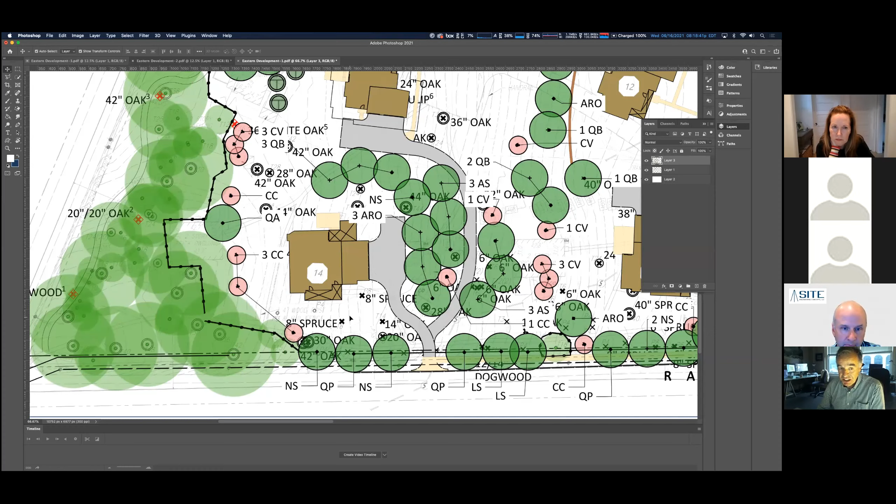So we were highlighting the additional ones, which Jesse did before, further up in the corner of the screen you're looking at right now. We've gone through many editions of this plan just to try and reduce the number of trees to be removed.

I'm a landscape architect, I love trees. I don't want to be taking trees down, but honestly this is the best that we can do within the parameters set by zoning and by the lot sizes that we have to go to.

But saying that, I still think it's a great plan, and we are planting a lot of trees here. We've reduced the number of lots, we've got more opportunities to put more plants in, and we're further away from the stream. So there's some real positive aspects to this plan.

Can you speak to the number of trees that you're planting, the 384 versus the number required? It's the number that's required, yes. Oh, so it's exact, okay.

Yes, but I was saying that we've got the opportunity because of the larger lots to actually fit them on the site. Sometimes you can't do that, and they have to go somewhere else.

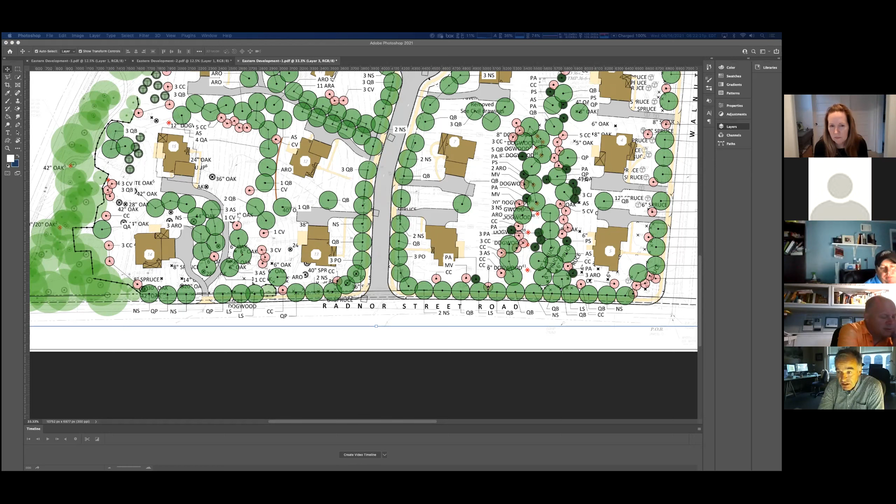And can you speak to the large canopy trees that you are planting, what types they are and where they are? Well, the canopy trees are the dark green, the lighter green, larger circles. There's a substantial number of oak trees. We're using white oak and willow oak that are more resistant to the prevalent oak diseases that are in the area.

We've got native sycamores on the list, which is a very large shade tree. There are river birch, which is an incredibly fast growing shade tree. We have red maples and sugar maples as well, and sweet gum also. So it's going to be a beautiful place to be, with great fall color, and tons of wildlife because we've got all of these oak trees.

So I think it's a great plan. I think the fact that the client is willing to transplant these trees is also a great thing, and it's going to be impactful in terms of screening and impact.

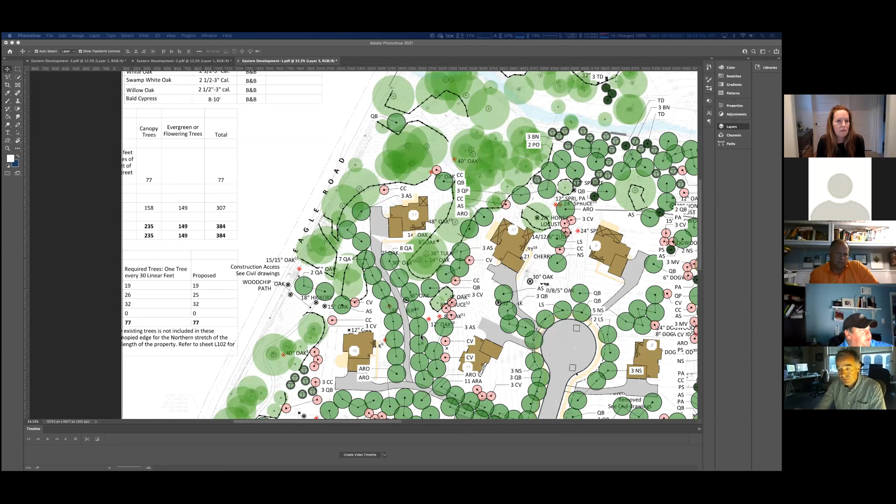The list looks great, everything adds up there. The way they did this plan, they have a table for the compensatory trees, then they have a table for the street trees required, which we don't always see. I think that's a great idea, and we should try to work that into the plans for future plans that come to us. It makes it a lot easier.

It was tough with the last design we had, there was no plan for those street trees. I think the plan looks great. I was looking on Google Earth, and the existing conditions look horrible. I know we're taking a lot of trees down, but there's, I think, close to 100 oak trees.

Within 10 years, we're going to have a decent canopy, it's going to grow in, and a lot of those trees, like Jonathan was saying, the maple tree, the 60-inch or 72-inch, that's probably going to be gone in 10 or 15 years anyway. So for what's there now and for what they're proposing, I think it's very beneficial for the township canopy in the next 10 to 30 years. So I think that's great.

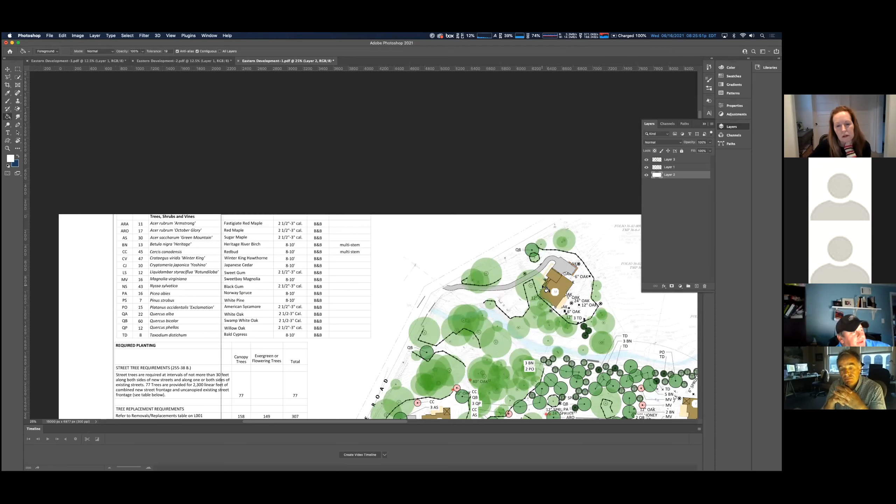The other thing, with the larger tree caliper sizes, for some trees I think that's a great idea. If we did around that cul-de-sac, we have the sweet gum, and it looks like Nyssa in there. I just don't know if that would be the best choice to go with a large caliper tree there.

Yeah, we can certainly work with you on selecting the species that would be better to size up. I understand. I think you and John Hosbeck would probably be the ones who could do that.

Another suggestion, at a greater expense to the developer, is whether there's some way to set up a watering schedule for all these new trees once they're planted, after the developer's gone. There are about 350 trees going in, that's a lot of watering. So James, maybe an ongoing maintenance plan for the next 10 years after.

Yeah, I wouldn't even go that long, depending on when they're planted. If you get one year of watering, I think we're in good shape. But whatever you guys think is best. I think watering is going to be significant, and if there was some way to relay that to the homeowners or the association.

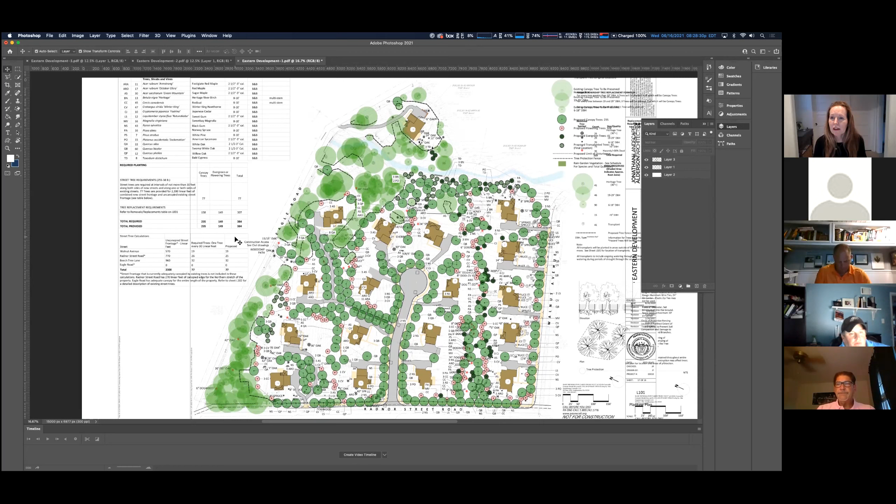Okay, great. Thanks, Steve. Seth, any comments? No, I really wanted to hit on what we just went through. It sounds like because of grading, everything was exhausted as far as options to save these trees. So it's very unfortunate that we're losing 25 heritage trees, but to James's point, if we start fresh and really nurture these trees, I think I'll be very happy to see the aerial Google Maps photo 10, 15 years from now.

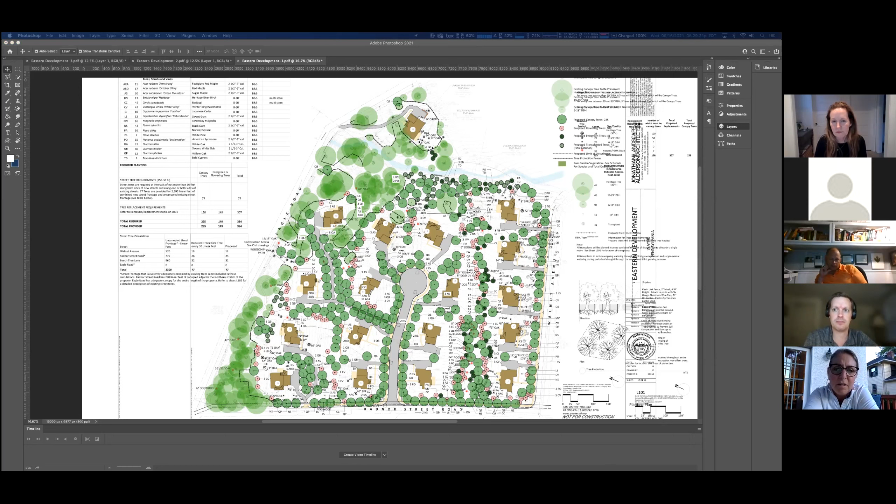So I think it's an improvement. Claire? I agree, and I'm especially satisfied with seeing that some of the trees that are still remaining. That makes me feel a little better that we still get to keep some of the canopy, and to improve the parking area and add trees there. I think it's going to be a big improvement to the overall site. I think it's a nice plan.

I think it's a great improvement to this chunk of land. I walked it the other day, and this is going to be pretty cool. I'm particularly impressed that you got the neighbors sold on this. I think that's huge, but I think you've done a great job. Matt? The neighbors are moving from one of the most blighted sites in Radnor to, I said it before, it's still arboretum level, choice of trees, arboretum level selection of placement of trees.

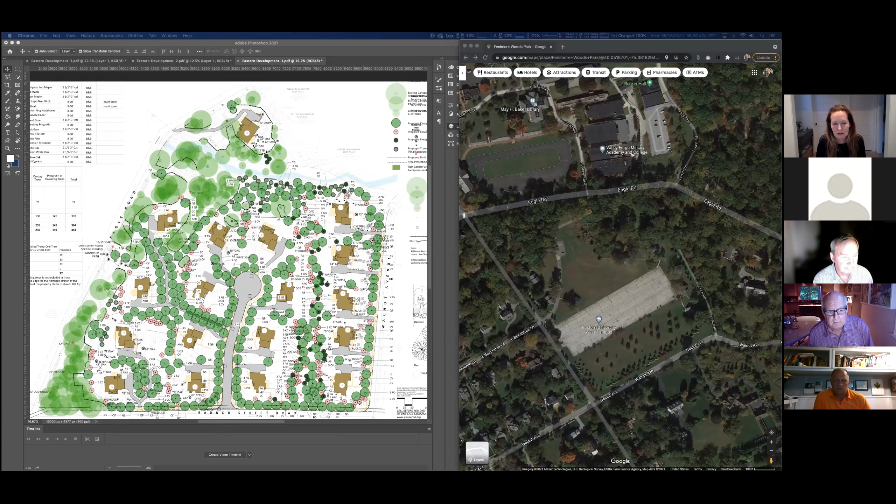And I compliment the applicants for continuing to forge forward after going through some strange zoning issues. So I'm much in favor of this. Okay, yeah, I must admit, I agree. I am impressed that at least along the perimeters, the trees are saved. I think in some ways we win. There's two less homes, and the trees are all on this site. I agree with James, long term I think it will be a great investment. I think we will gain tremendous tree canopy.

Gaining 384 trees on this site, especially given how the site is now with so much impervious area. I also appreciate the fact that the applicant is willing to take at least 10 of the trees and upsize them to 4 inches. I'm okay with them choosing the location for those trees. And the watering plan is huge because it is a big investment, and we don't always have that even with the trees that we plant. So that's great that it would be part of the HOA plan.

So, motion to approve. One last thing, Eileen.

Yeah, of course, James. Sorry, I mentioned this last time they came before us, but if you guys are doing so many transplants, just a reminder, if during construction you can't store them very long, everybody would agree that maybe contact the township and we could place them somewhere in the township so they won't die during the holding time. Or to keep a maintenance schedule with those as well. I think leave the invitation there to plant them around the township if you end up not using them.

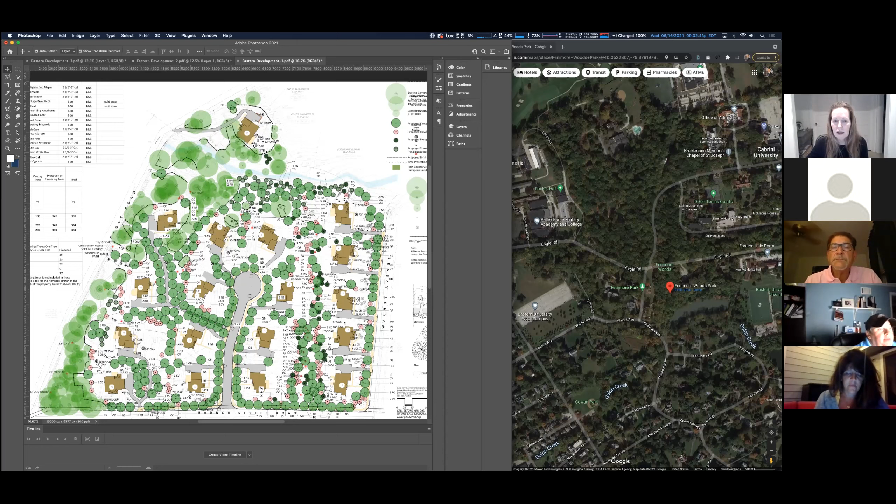I'll second. Okay, all in favor? Aye. Aye. Aye. Okay, great. So we approved that. So Seth, I'm going to hand the agenda back to you. Sounds good, thank you, Eileen. No, thank you. All right.

So I think that takes us through all of the new grading permits, so tree removal without approval clearing permits. We have 400 Yorkshire and 815 Parkes Run. Steve or John, you want to speak to those at all?

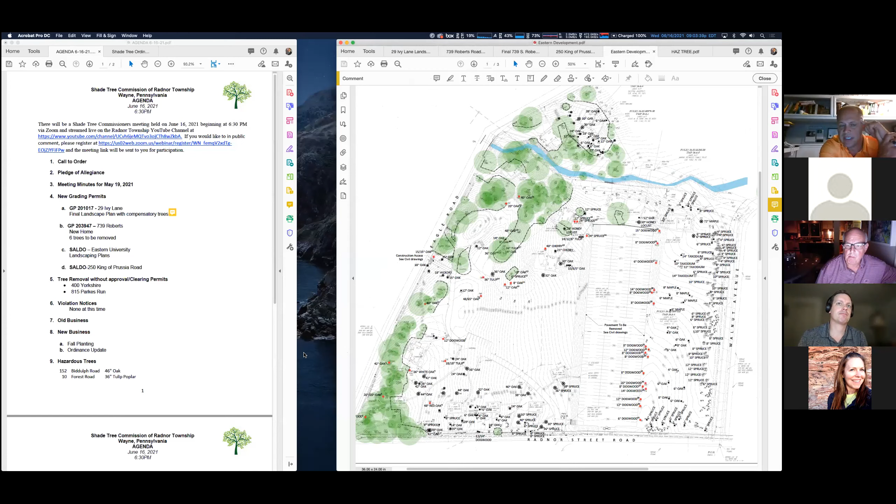So Steve, I'll take it. We had two unauthorized removals of trees on both these lots, 400 Yorkshire and 815 Parkes Run. We are still waiting for information. Ms. Sherwin sent a request to these folks asking for certain line items that I requested, and we are hoping to have that in within the next week or so. Great, thank you, John.

All right, violation notices, none at this time. Not yet, not yet. Old business. I don't think, obviously we have ordinance updates to talk through under new business, which kind of falls under old business too, but does anyone have any other old business outside of the fall planting and the ordinance update that they want to speak through? Nothing? All right.

So fall planting, I do have a small update. We got final numbers from Bob Tate. The money left in the shade tree fund as it stands right now is $5,600. Now that of course doesn't contain future funds coming from any violations or in lieu of.

And then also, Steve, Mr. Norsini, over the past couple shade tree commissions, we've been adding trees to our tree bank, so we have to keep that in mind too. But it looks like, at this time, we have very limited funds to even pull off a full fall planting. Now, of course, the other consideration here is the Conservancy makes a very generous donation every year that usually is in the fall time, but of course that's not necessarily guaranteed. And Chanticleer as well, right? And Chanticleer, correct, yep. So I think we still need to do a little bit of thinking here, but we just wanted to present that information and let everybody know.